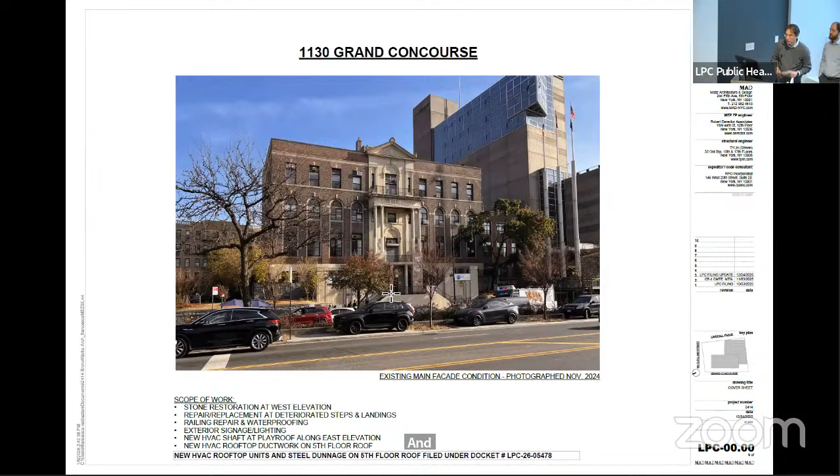As John said, this is the building. It's 1130 Grand Concourse. It's just at the 167th Street station of the D train. The building was constructed in 1926, and the proposal, as you can see at the bottom of the slide, is to essentially restore portions of this facade, the main facade, repair and replace deteriorated steps and other architectural features. Then there is a proposal for some signage and illumination as part of the restoration, since we're doing this work, and an HVAC proposal as well. We're going to focus on the first part of the presentation, which is the restoration work, and then we'll discuss the mechanical components of the project.

These are photographs for reference. You can see the 25-26 timeframe, as John mentioned. This is just as the building was finishing construction on the left, and the 1940s tax photo on the right. So you can see that the building looked pretty much the same at the 1940s.

It's located, you may be familiar with the Housing Court building and the Freedman House, the Freedman Home, which is right across the street, in a very elegant, wide portion of the concourse. As John mentioned, they do amazing social services, great organization. Our work essentially is to focus on the central portion of the building and also reconstruct certain components that have been stripped away from the building.

On the left is a photograph of the present day image of the building. It's had a lot of windows replaced. You can see that there's a lot of air conditioning units, et cetera. We'll see these photographs a little larger shortly. One of the key pieces of our proposal is the base of the building, which you can see on the top right.

It's basically been stripped of all of its architectural features, and there's essentially a very brutal stucco wall present between the two staircases that are the main entrances for the building. Since you do have to ascend these steps to get to the area where you see that 1130, that is the main entrance to the building, folks do have to use these steps.

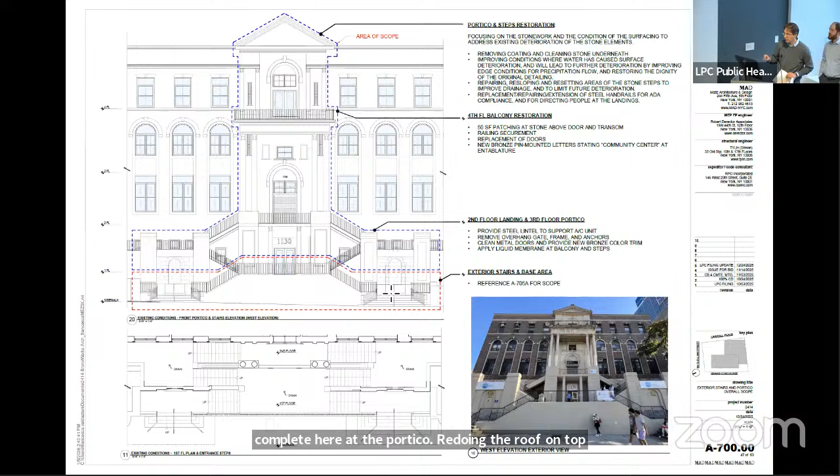There's restoration work that we're proposing to complete here at the portico, redoing the roof on top of this porch and balcony, the pediment, and there's a lot of paint that used to cover some graffiti and other things that we're going to be able to restore. Not any major removal of any of the parts, but basically a lot of surface cleaning, all the way down that central area within the blue zone.

The more substantial work is in the red zone at the base of the building, and that's what we're going to focus on here today.

When you look down in plan, at the top you'll generally be seeing our existing conditions, and on the presentation the lower portion will be the proposals.

There's a series of elevations that you can see here, starting from the bottom at the sidewalk. You go up a series of steps, about 6 or 7 depending on where you are on the sidewalk. You arrive at these landings, then go laterally and find yourself in the central zone, which allows you to come into the building where that 1130 was written. You can also continue up the steps, but that hasn't been done for a very long time, since the upper portions of the building are closed off, and there are some very simple chains that prevent you from continuing to ascend the stairwell, so you really are coming to that main central landing and then entering the building.

In our proposal, we're looking to do a series of things that we've highlighted here in color: reconstructing these green piers and the steps that lead from the sidewalk up to the first landing.

Reconstructing the two pink steps that you find to ascend to the landing, and then introducing a ramp, which is the orange piece, that takes you up essentially two risers, so that from the blue area you don't have to go through single steps to get into the building, just to facilitate the access.

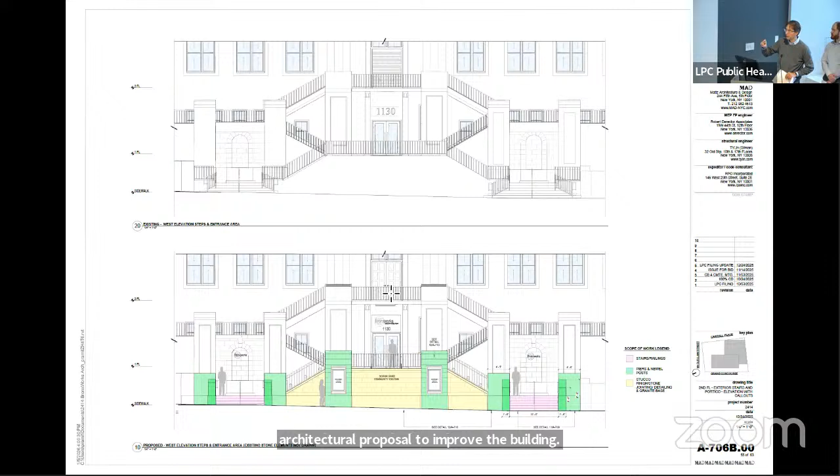At the base of this yellow zone, for example, and around the green piers, we bring back a granite base so that we have a nice durable surface and it's historically appropriate. In the upper band of the yellow, where you see the stone that replaces the limestone, we're doing it in stucco.

Obviously for the same reason that I explained earlier, the piers help us to limit the amount of steps that are within the pink zones, which we're going to see shortly in the photographs.

And then the central piers, the taller ones that you will see in the photographs coming up, we propose to put 2 digital signage screens to help the organization communicate what it does in the building as part of its programs. A larger version of this area focuses on the right-hand side of the plan and elevation, which you saw. Since it's basically symmetrical, this way you can see the architectural features in the proposal in a very clear way.

Top left, you see the existing condition and those steps that we were looking at in plan, and the railings that have been installed. The condition of the arch behind it, temporary signage that's been placed on the building, and you're going to see that what we've done is not only address the restoration components of the building, but then try to help them also identify in a more elegant way how their organization can do its outreach visually.

On the bottom left is a photograph from 1926, and you can see that originally the building did have these piers. They had urns and some stone detailing, as you can see, leading up to the top. Just behind the tree, there's actually a lamppost, which you may have noticed on the original photographs. We're obviously not coming here today to put back these piers in their identical manner, or the lampposts or the urns, but bringing back some of the features that we can reintroduce so that the building does get a good portion of its elegance back.

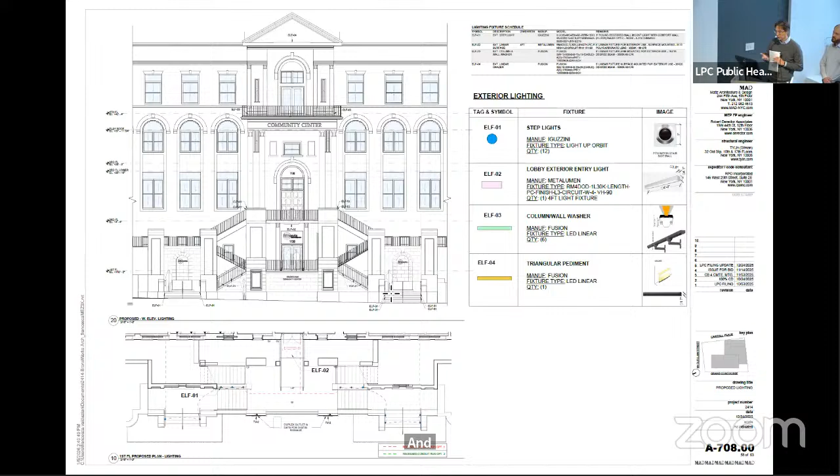Once we were looking at restoring the building, we spoke with BronxWorks and said that in a few spots we could do a little supplemental lighting to more elegantly treat the facade, which currently isn't illuminated at all. Aside from the step lights at the base, we're proposing very small fixtures, only 2.5 inches high in profile. The world of LED has really made our architectural lighting proposals so much easier without feeling invasive.

At the base of the columns, there's a proposal to uplight them. Above on the balcony, on the ground, you would not see the light fixtures, which also illuminate the pediment with a pediment light. We've annotated these on the plan, and you can see there are only a few spots where this is happening within the area of restoration.

Now my colleague will speak about the mechanical work. The other portion of the project is providing a central HVAC system for the building. The vast majority of the spaces don't have any air conditioning and rely on window AC units, which you may have seen in some of the photos throughout the building.

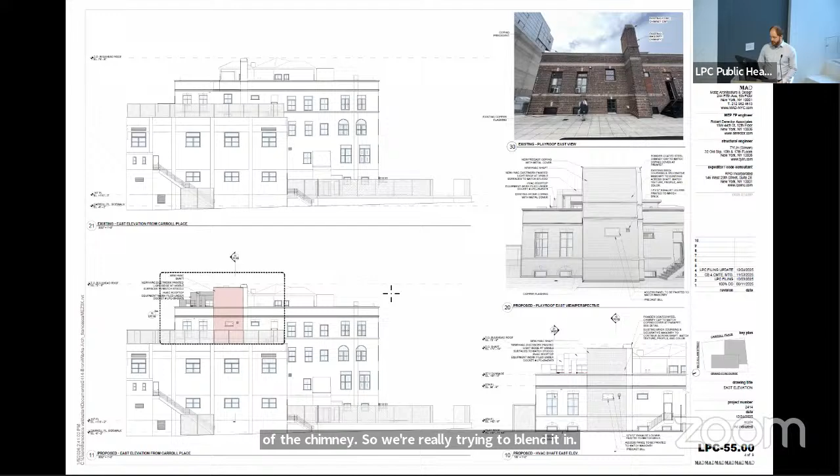The one position where you are able to see the shaft is from the northeast corner of the building, at Carroll Place and McClellan Street. From that corner, basically at the entrance of their current parking lot, we've hatched in red where the new shaft will go, tucking it in behind the chimney as best as we can to create one volume and have it blend in.

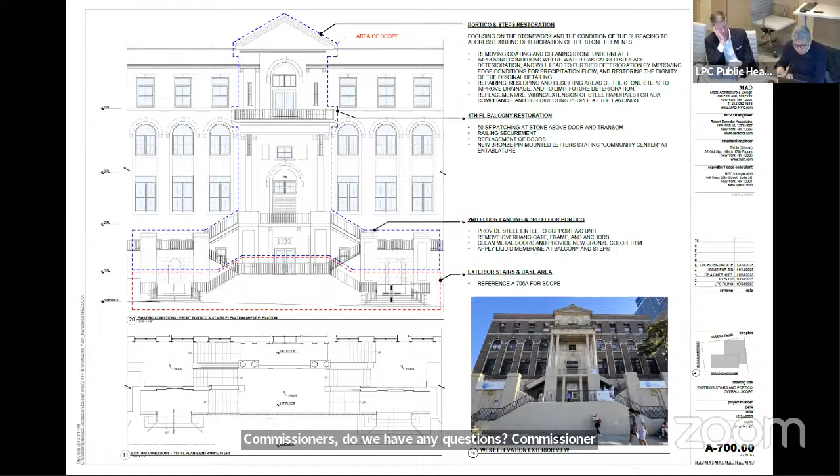Commissioner Chen? Yeah, if you can go back to your drawing, I guess, with the 706. This one, Commissioner? Oh, yeah. I'm looking at the lettering for 1130, which is on the upper portion, right?

I think the difference with what you're proposing now is that you intended for pedestrians or visitors to see from below. I'm wondering whether it's best, since you have so many displays down here, to identify whatever you need to put on the lower level rather than diminish the 1130, which is very distinctive and very easy for people to identify the building. People have trouble finding buildings and addresses on the street, so I'm wondering whether there's a better way to leave the 1130 as is, because it's highly legible and has a very nice font, and accommodate your other display separately.

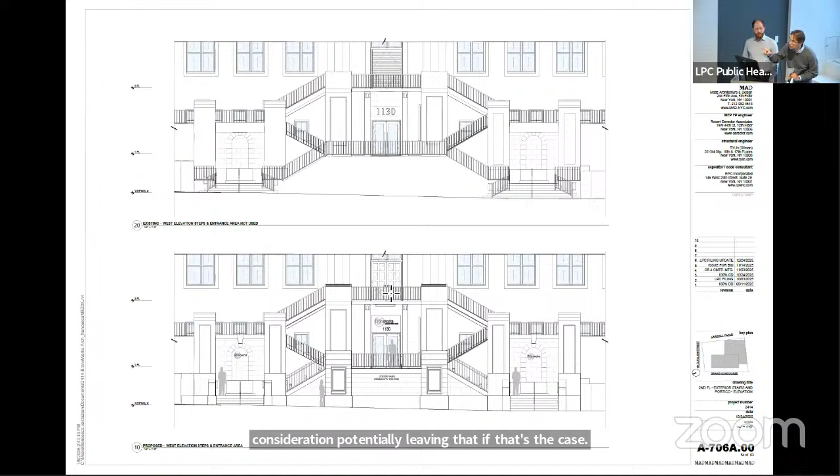Sure. You're correct that 1130 is very large and visible. We felt that scaling it down and allowing space for the name of the actual organization was going to work out. By having the Bronx Works identifiers in the arches, they'll hopefully be very visible because they'll be right in front of you as you find the steps. And of course, the digital signage, we hope that will also have information. But I guess we can take into consideration potentially leaving that if that's the case. We thought that between the name of the center and the digital signage, that would collectively identify the building.

Yes, I think, yes, thank you very much. Understood. The scale might have been reduced too much, and we can work with staff to increase that typography a little bit more. Thank you.

Any other questions? Commissioner Mahan? Hi there, a few questions. In reference to the signage we're just speaking about, are the doors and transom above it new or existing to remain? Those are existing to remain, but the transom we would be replacing so that we could take away that 1130 and rework the signage that's proposed, but the doors are existing.

And what will be the material of the new transom then? So we were going to have an aluminum backing, and the letters are also aluminum, with a bronze finish, consistently having a bronze finish for all of the signage so that it all looks singly done. Between the signage at the top of the building, the name at the bottom, and all the logos would be in the same bronze finish.

Thank you. You noted that there is granite being brought back. Where is that? Using the mouse here, the base of this portion, is that all granite? And from where that is, datum line down to the sidewalk. Thank you. And where's the stucco that you noted? So from that same datum, everything above that will be in stucco, but with the coursing implied, so that we bring the scale of that wall back to its original character.

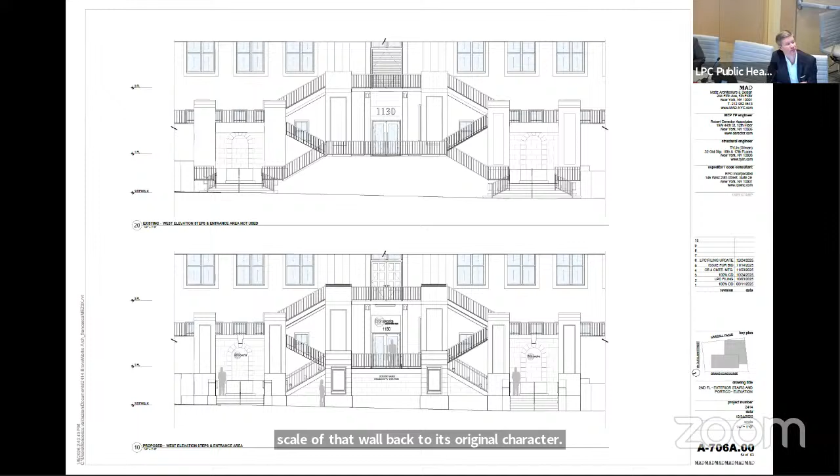Understood. I have one more question. Can you explain the purpose of the ramp, which is replacing two steps, but one still has to traverse nearly an entire floor's worth of steps before getting there? I didn't really understand that. Sure. As we acknowledged, this is not solving the accessibility for the building, but what it does is address the hazards present in this local area, at the very least—two single steps that are hard to see at night.

So if you can imagine in the evening, that one step in the foreground between the columns, and there's another one right at the door. So in order to facilitate those two single steps, what we've done is in section, take the elevation of the ramp landing and bring it to the doors, so that you have a proper flat surface when you exit—if you're coming out with an older person or with your kids—you have a level surface, not a step immediately, and then gradually descend down to that open space right in front.

So you also don't have that second hidden step that you might not notice right at the front edge. We're essentially solving two potential hazards by having a slope that facilitates entering and exiting the building. You're correct, it's only at this location, but at least we've addressed these other hazards that are present.

Commissioner Wilder: Thank you. Quick question tied to the ramp. I'm trying to understand what typically happens with circulation in that area. Because when you're adding the ramp, I guess the railings are kind of cutting off the sides, and also in front where the ramp starts, that seems like it would be a natural area for people to walk. So do you think this will negatively impact the way circulation happens around this base?

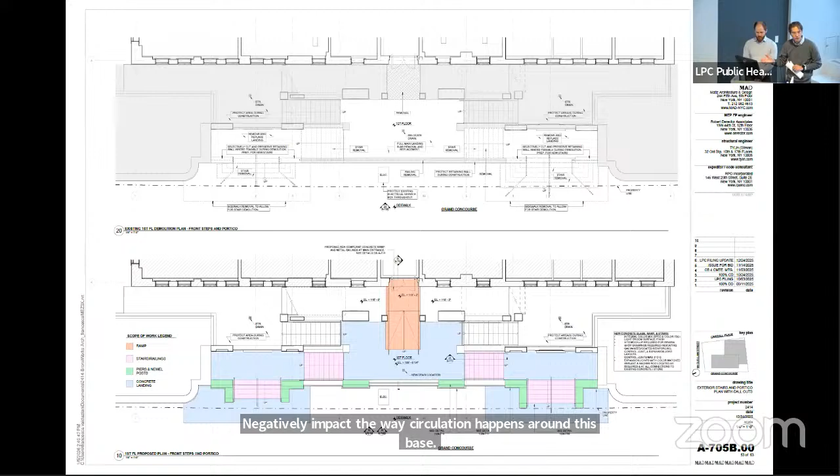As you asked your question, I was going to the slide that I hope would help answer you. Here we're looking at the full plan of the entire stairs and landing system. You can see I'm guiding you to the orange portion—the two doors that swing out as you enter the building. The ramp would be composed of a portion that allows—you can see we've consciously left the front of that landing and the bottom of the ramp to align with what we see as a natural rectangular surface. So if you are walking up to the building, you still have all of that blue area surrounding the orange ramp to stand, socialize, etc., and then you can enter the building.

You would also be able to squeeze between the pier and the sidewalls if you wanted to—we're not preventing you from cutting through here or through here as well—but we think most people will just enter through there, and this would be an open space here.

Yeah, the sides are dead ends basically, underneath the upper stairs coming down. So the head height quickly goes down to only about 5 feet, and they're basically dead ends. There's a couple window AC units there. So it's actually a benefit to kind of guide people away from using those spaces since they're kind of a dark dead space.

Not currently, and there is one light above, which you see, where we're going to replace that with a larger linear fixture so we better illuminate the space, but basically both sides are dead ends. And Commissioner, currently if you were to walk under that portico and look to either side, you'd see the actual existing steps.

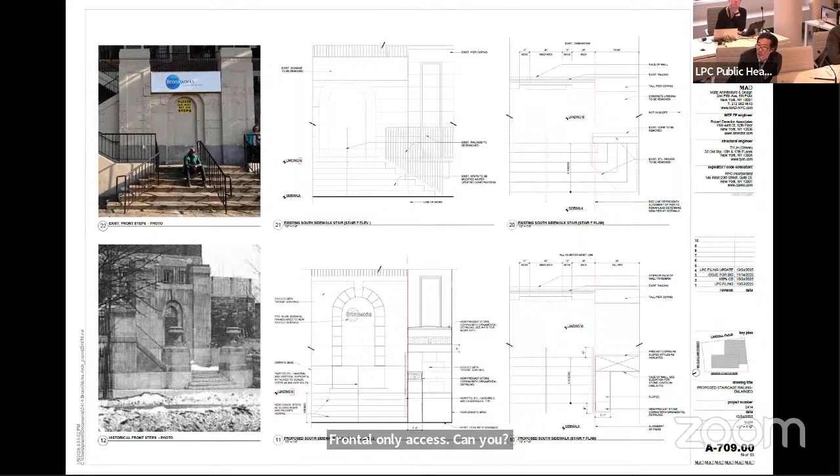Sure. So in analyzing what we could potentially reintroduce, the idea was to bring back that rhythm that obviously has been removed. There were some internal conversations about whether to put back the piers at the same scale and size they were originally—they're larger—and we were concerned about the massing, but then we weren't going to be putting back the urns, and we weren't going to be putting back any lampposts, etc. We would have had these large, heavy piers that we'd be discussing today with nothing sitting on them.

So we thought that if we made a slight modification to the proportion of these, we could still recall the history of the building, and do it in a way that would be subtle enough that only us having this conversation today would realize it compared to the historic photo. We can elegantly reintroduce the piers and make them slightly smaller, which is what you see in our proposal, where they still contain the steps and still welcome you into the building, but because of their rectangular nature... let me just go to the plan, apologies.

I'm going in the right direction, sorry. Yes, in plan, you can see that by staying shallower with these green features, we don't have this large horizontal surface like in the original photograph, which would have been a flat surface we'd have had to deal with from a water management standpoint, but then it would have felt like we put back an empty element to the building. So we come to you today with a proposal to reintroduce all of these, bring back the rhythm, bring back the elegance to the building, but do it in a way that's not an exact replication of the original.

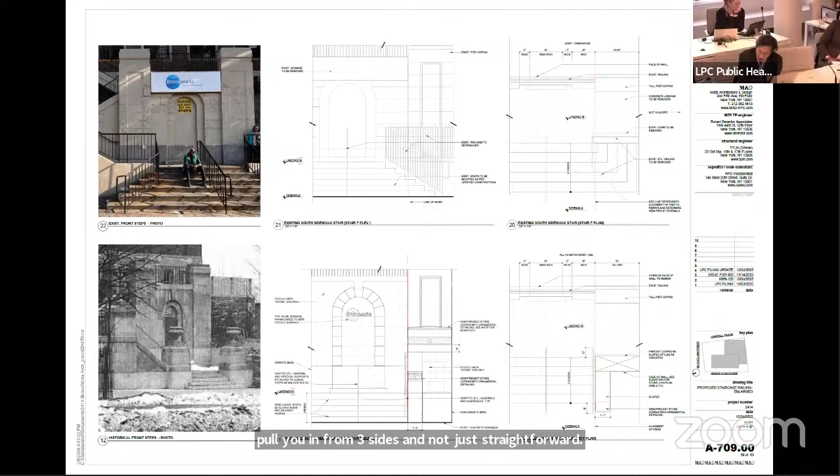Another question I had is you mentioned recessed screens for the digital elements. Did you mean recessed into the stucco, or did I mishear you? That's correct. In this particular case you can see them contrasted, the white to the green. They're actually recessed into the new piers so the screens are flush with the stucco, and we don't have these additive boxes built on top. We're able to set them into the wall.

My only comment there is the long-term viability of that. We often do these digital monitors inside lobbies in sheetrock, and everyone always says why did we do that, because the screen just changed size the next year. I wonder whether that's aesthetically... I understand what you're saying, but because they are in fact imitation or faux stone, it may accentuate the faux nature because they're recessed, and that would never really happen in such a manner in true stone.

Understood. Would you be concerned about the maintenance and the viability and their life cycle long term? I'd hate for there to be a new screen five or ten years down the line that didn't quite fit right, or seemed like a funny retrofit. You're correct, obviously technology shifts while we're speaking, but the cases are independent of the screen, so the screen could be placed in there. As long as you're pretty close, you can get one that would be replaced if necessary. So the case and the screen are two independent components, so if there was a failure of technology, that screen could be replaced within the same case.

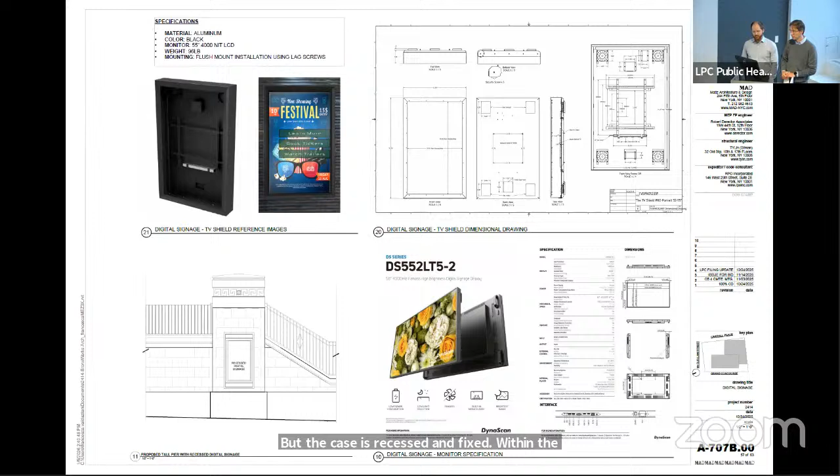But the case is recessed and fixed into the stucco? Within the stucco pier, yes. Okay, I think that covers my questions. Thank you. Commissioner Jefferson?

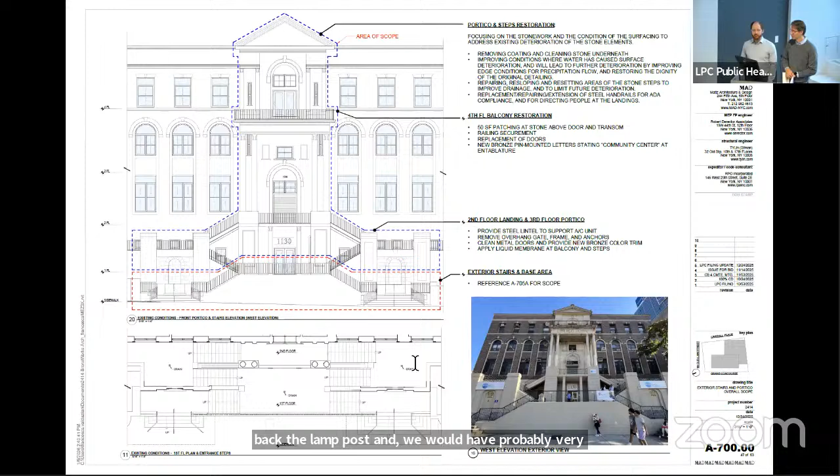Okay, any other questions? Let's move to public testimony. I'm going to note that there's nobody in the room to speak on this item. I'll turn it over to our Director of Intergovernmental and Community Affairs, Stephen Thompson, to see if we have any remote testimony. Those joining via Zoom who wish to speak, please use the raise hand function. Seeing none, I'll note for the record that Bronx Community Board 4 recommends approval.

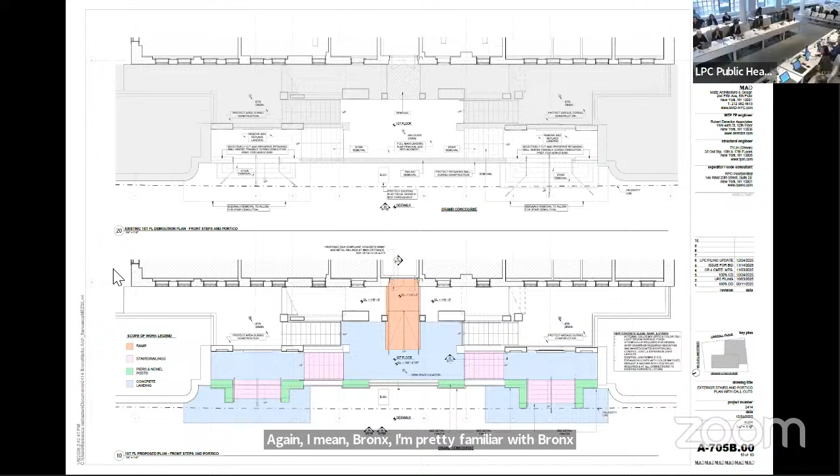Again, I'm pretty familiar with BronxWorks. The mission work is so important to our city now more than ever. I think their association with this building is very important.

Thank you, Commissioner Chen. I'm in agreement with Commissioner Goldblum. I think the ramp in the center door is important, even though that single step is dark—when visibility is low, I think it will help prevent accidents. I think it's unfortunate, correct, that this building is not more ADA accessible, but given the limited budget, I can tell by the tone of the applicant's voice. I will follow Commissioner Goldblum's suggestion about having them work closely with staff regarding the stucco.

Thank you, Commissioner Mahan. Thank you for the presentation and the important work that the owner undertakes. That being said, I personally had some difficulty following the decision-making logic in this project.

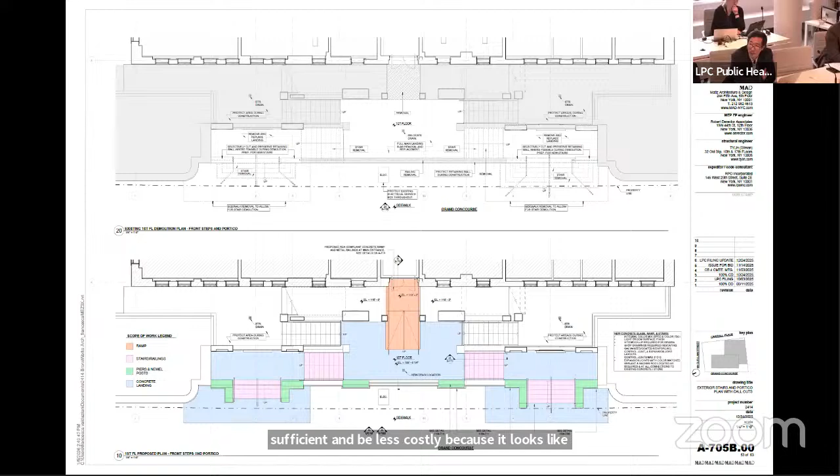Those are my comments. I think the rest of this looks fine to me, the signage, the minimal approach. I'm okay with the rest of the proposal. I just think the base needs some work at the walls and the detailing. They seem a little too simplistic, and I think that can be done at a staff level.

Thank you. Commissioner Jefferson?

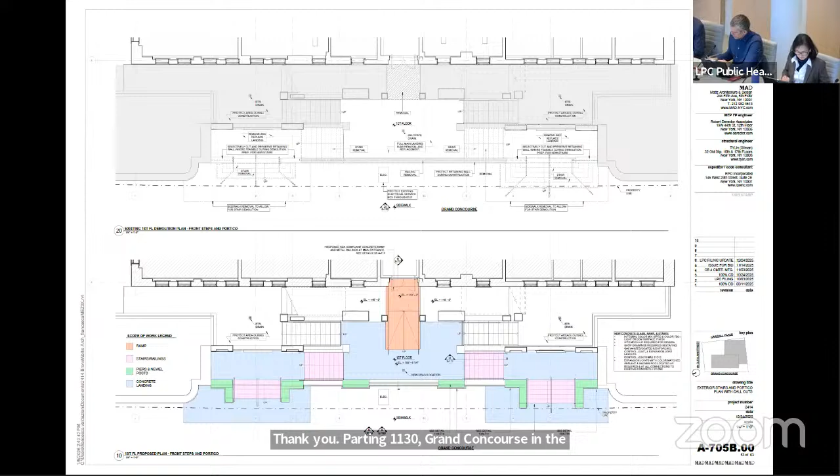Regarding 1130 Grand Concourse in the Grand Concourse Historic District, the application is to alter the facade and stairs, install signage, and construct a rear yard mechanical addition. I note that the building style, scale, materials, and details are among the features that contribute to the special architectural and historic character of the Grand Concourse Historic District, and I recommend approval with modifications.

Finding that the work will not damage or eliminate any significant architectural features of the Grand Concourse facade, but will restore it to a condition more in keeping with its original appearance, including the restoration of piers and reorientation of steps to better recall the placement, dimensions, profiles, and details of the original stone stairways. That the proposed resurfacing, mortar, stone copings, and granite base will match the color, texture, finish, and bond pattern of the original stone. That the proposed installation of a ramp at the first-story entrance...

That the proposed signage, consisting of non-illuminated pin-mounted letters for building identification and illuminated inset LED sign boxes for programmatic information, will be in keeping with the variety of signs traditionally found at larger institutional buildings, including at this one. That the proposed signage will be well scaled to the entry piers and walls and will remain a secondary presence to the highly ornamental features of the facade, and will not overwhelm the building.

That the proposed masonry-clad HVAC shaft at the rear facade, which will be partially visible at an oblique angle from McClellan Street, will be placed adjacent to an existing masonry chimney clad with brick to match an adjacent wall, and will screen. That the work will enhance and support the continued use of the building as a community center and will not detract from the special architectural and historic character of the Grand Concourse Historic District.

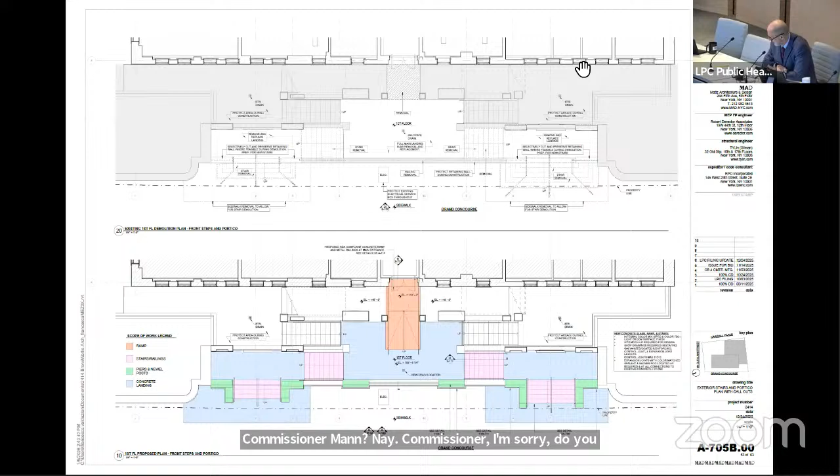Vice Chair Master, aye. Commissioner Chen, aye. Commissioner Chu, aye. Commissioner Goldblum, aye. Commissioner Jefferson, aye. Commissioner Mann, nay. Commissioner, I'm sorry, did you say nay? Nay. Commissioner Wilder, yes. Okay, with 6 in favor and 1 opposed, the motion passes.

Thank you, that's been approved with modifications. Please continue to work with staff.

All right, we'll now move to the next item, public hearing item number 2, LPC 26-04038, an application for a certificate of appropriateness in the Borough of Brooklyn, Block 324, Lot 55, 362 Clinton Street in the Cobble Hill Historic District. This is an Italianate-style row house built in 1843, and the application is to construct a rear yard addition.

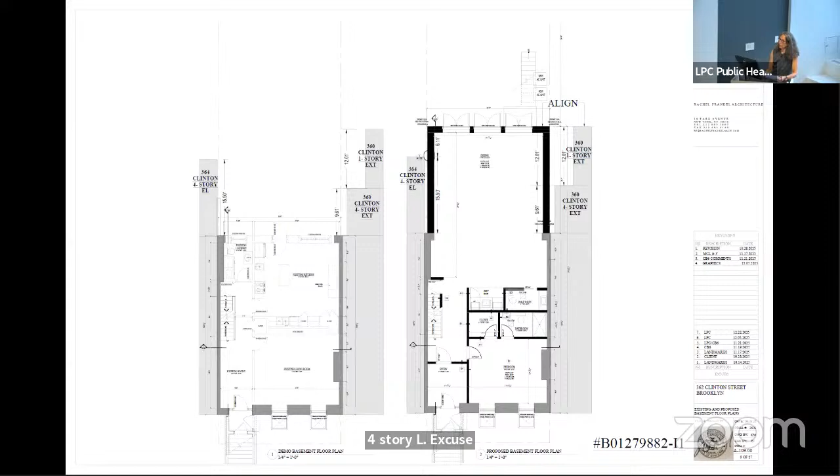Existing and proposed parlor level floor plans, same footprints as I just described for the basement. Existing and proposed second floor plans.

The proposed four-story extension aligns with adjacent 360's full-height extension and is set back 6 feet from adjacent 364's full-height L. Where our four-story building was once hemmed between its neighbors, it now aligns with the one on the right, yet remains hemmed behind the one to the left.

Existing and proposed third floor plans, same as the floor below, as just shown. And existing and proposed roof plans. No work proposed for the roof.

Now for context, precedent, and visibility. Fire insurance maps from the late 19th and early 20th century show the persistence and precedence of several large rear yard extensions in the block, and that as early as 1886, the unity of our row's rear facades ceased to exist.

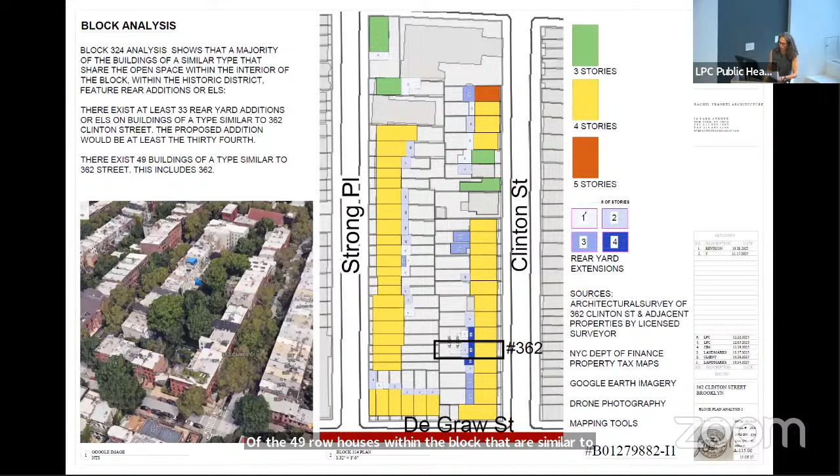Of the 49 row houses within the block that are similar to 362, 33 of them, the majority, have rear yard extensions.

To reiterate, our proposed four-story extension aligns with adjacent 360's full-height extension and is set back 6 feet from adjacent 364's full-height L. At the upper floors, our building will align with one neighbor but remain set back from the other. Our proposed lower two-story extension aligns with 360's one-story extension and projects in front of 364's full-height L.

Several of the historic extensions in the block extend deeper into their rear yards than our proposed two-story extension would in ours. Our proposed extension leaves an ample rear yard, and because any continuity of the row ceased to exist long ago, and the context is varied, our proposal does not disrupt the historic fabric. Our proposal is only minimally visible from DeGraw, and therefore the public's experience is not changed.

On the left is the view from DeGraw in 1969 at the time of designation. On the right is the same view today, with a photo montage of the proposed four-story full-height extension along with a zoomed-in, not actual view. The proposed two-story extension is not visible from this view.

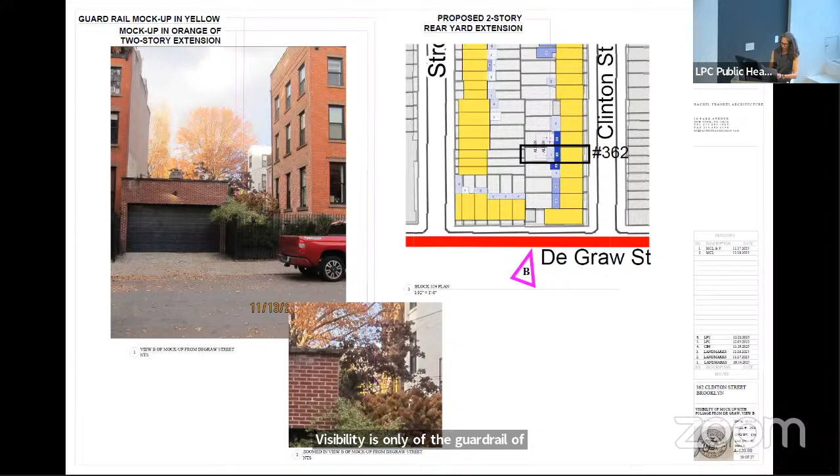This photo is taken from the same view without foliage. From this view too, there's no visibility of the proposed four-story extension. There is some visibility of the proposed two-story brick extension and its terrace guardrail and stair leading to the rear yard.

This is a view of the mock-up from the rear yard. This slide juxtaposes the view of the four-story mock-up on the left with a photo montage on the right, all with foliage. This slide juxtaposes the same view, all without foliage.

This slide juxtaposes the view of the two-story mock-up on the left with a photo montage on the right, all with foliage. Visibility is limited to the terrace guardrail. This slide juxtaposes the mock-up of the extensions. This story juxtaposes the view of the two-story mock-up on the left with a photo montage on the right, all without foliage. The prior one was with foliage. Pardon me if I got a bit confused.

And this slide juxtaposes the mock-up of the extensions with the photo montage viewed from the rear yard.

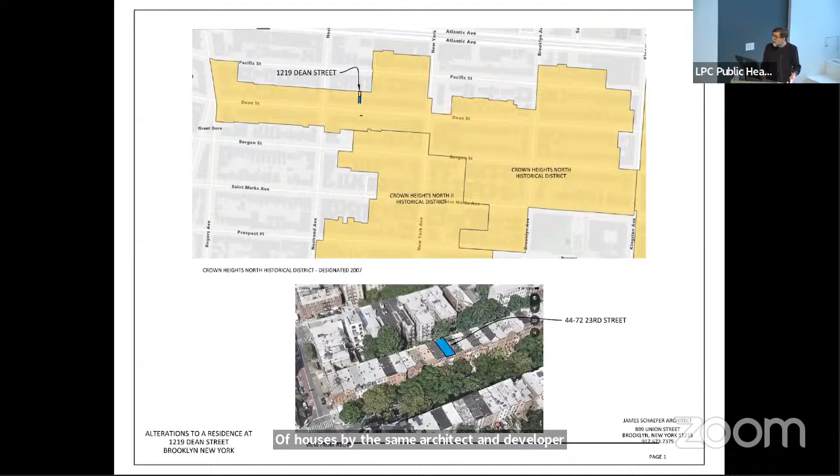My name is James Schaefer. I am representing the owner of 1219 Dean, part of the Crown Heights North Historical District, designated in 2007, a Romanesque revival built in 1891, designed by Albert White, part of a pretty intact row of houses by the same architect and developer. I know you have a busy schedule where our ask is pretty small. We're basically talking about 3 transom windows, so I'll get down to that.

These are shots of the neighboring buildings with ours in the circle, the tax photo and the designation photo. The only picture we could find of the transoms in question is there at the bottom.

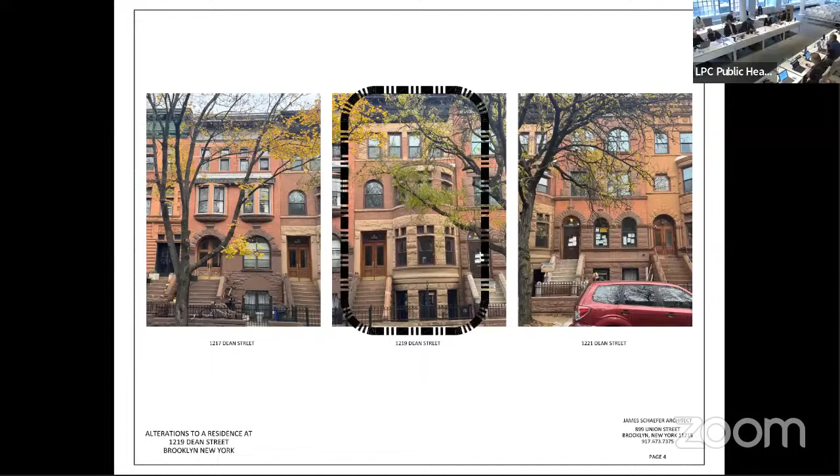Good morning, Commissioners. I'm Christina Conroy for the Victorian Society. The Victorian Society urges denial of this proposed legalization in the strongest possible terms.

Stained glass windows are a very typical feature of Romanesque revival houses. Architect Albert E. White included them in the design of several houses he designed in Crown Heights North, and the ones removed from 1219 Dean Street are specifically mentioned in the designation report. If the windows were removed and not retrievable, there are many stained glass studios in New York City which would be able to recreate them.

If energy conservation is a concern, at these very small windows, interior storms would be a perfectly appropriate solution. Thank you, Commissioners.

Anyone else joining via Zoom who wishes to speak, please raise your hand. Seeing none, I'll note for the record that Brooklyn Community Board 8 also recommends denial, citing the stained glass.

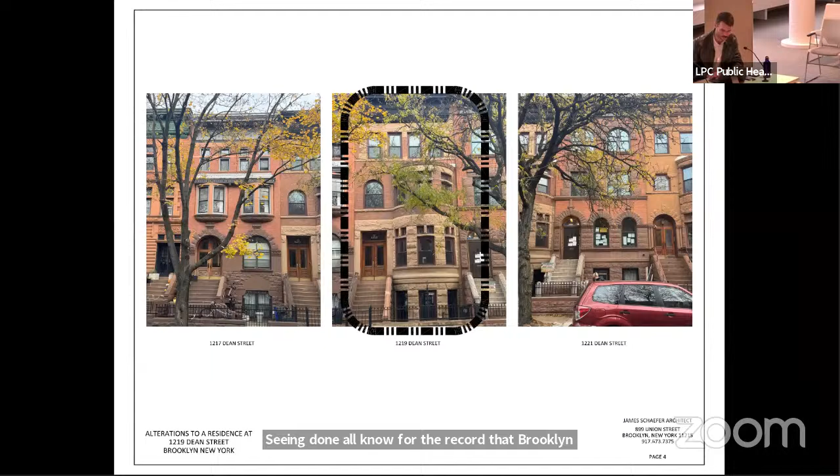Thank you. Would the applicant like to respond to the comments? The only response I have is that it was a decision based on time and expense. Since the owner did install the transoms on the parlor floor, it wasn't an aesthetic choice and it's not an energy choice. It was just for time and expense.

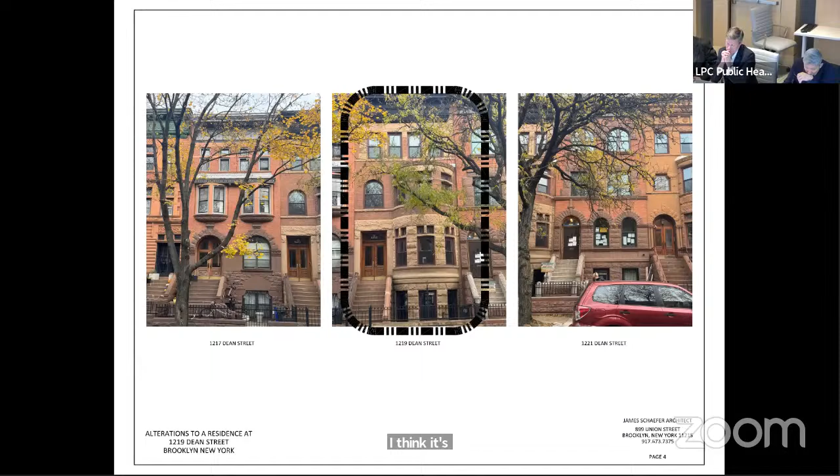Commissioner Wilder? Yes, thanks for the presentation. I think it's a good thing that the stained windows at the parlor floor were able to be reinstalled. Unfortunate for the second floor that they were not found. I think I would definitely prefer the stained glass over the clear, but I can still find it appropriate.

Thank you. Commissioner Ginsburg? Hopefully I didn't just disconnect. I guess not. I can agree with Commissioner Wilder. Thank you. Commissioner Mayen? Looks good. Thank you. Commissioner Chen? Same here. Commissioner Goldblum? Agreed. Commissioner Jefferson? And Commissioner Chu? Okay. Would you like to read the motion?

In the matter of LPC 25-11-523, 1219 Dean Street, Crown Heights North Historic District, a Romanesque revival style row house with Renaissance revival style details designed by Albert E. White and built circa 1891. Application is to legalize replacement of stained glass windows without Landmarks Preservation Commission permits. I note that the building's style, scale, materials, and details are among the features that contribute to the special architectural and historic character of the Crown Heights North Historic District.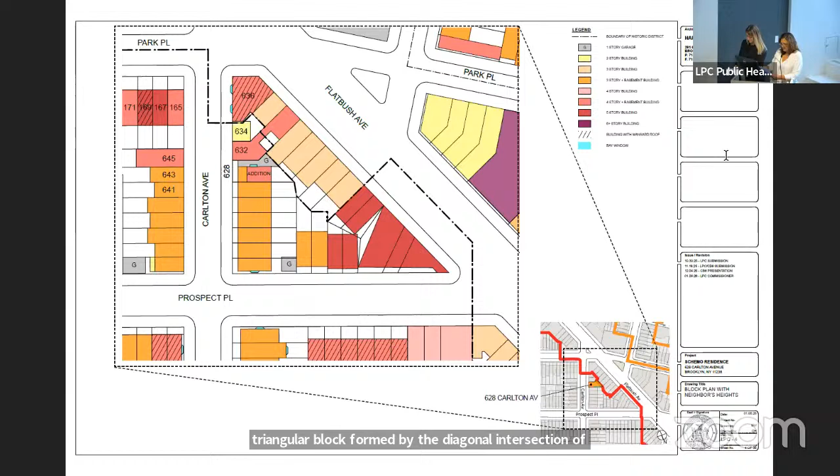As you can see, it's a triangular block formed by the diagonal intersection of Flatbush Avenue with Carlton Avenue and Prospect Place. As seen from Prospect Place, 628 Carlton is the last in the row before the nature and scale of the block changes. The rear property line runs parallel to Flatbush, and the view into the donut is compromised by unprotected rear facades on Flatbush and taller structures at the corner. There are also many taller buildings at the intersection of Flatbush, Carlton, and Park Place, which are 4 and 5 stories tall with varying mansard roof conditions. The juxtaposition of this end property to those buildings makes it unique in its context.

This is the same view via Google Earth, where you can see the triangular donut, taller buildings at the end of Carlton, and the rear facades of the buildings along Flatbush, which is outside of the district.

These are street view images for context, showing the varying scales of the buildings and surrounding property. The upper row is 632, 634, and 636, immediately to the left of the property. On the bottom left, you can see 643 and 645 on Carlton, across the street, which also start to break the height mold. And then a few properties along Park Place, 167 and 169, that also have varying heights.

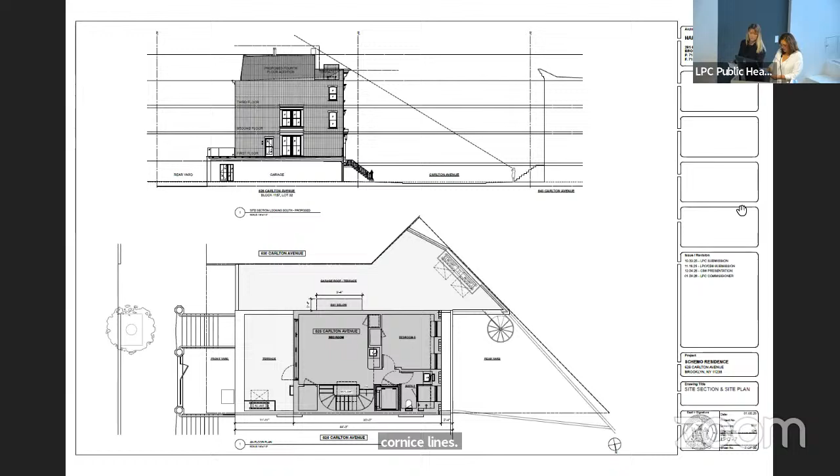In the next few slides, we'll show you a series of renderings and the mock-up of the vertical addition and its visibility. For reference, the highlighted yellow dots show the only places where the addition can be seen within the cone of vision. In this first view, view A, the addition cannot be seen.

Here you can see it minimally, the addition from the left side of the building. But also because we're increasing the wall height along that side facade, its visibility is limited.

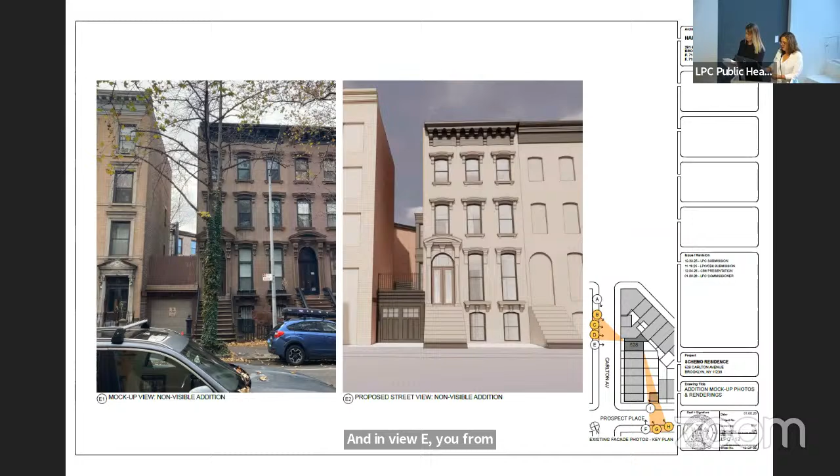In views C and D, coming up next, we can see it visible from the side, and you can start to see the bay window. We believe this side visibility is pretty consistent with end buildings typically seen in historic districts. In view E, from immediately in front of the building, you can't see the upper floor addition, but you do see a little peek of the bay window over the garage.

From the rear, there are two vantage points where it can be seen, which we're going to walk you through - those are G and H. But for starters, this is view F, where the mock-up cannot be seen. These next two views are the only two views in that cone of vision from Prospect Place where you can see the rear, where you could see the addition.

These are views G and H. So this is view G. And here at view H, you can also see that there's some pretty strong foliage that does hinder the visibility of the addition.

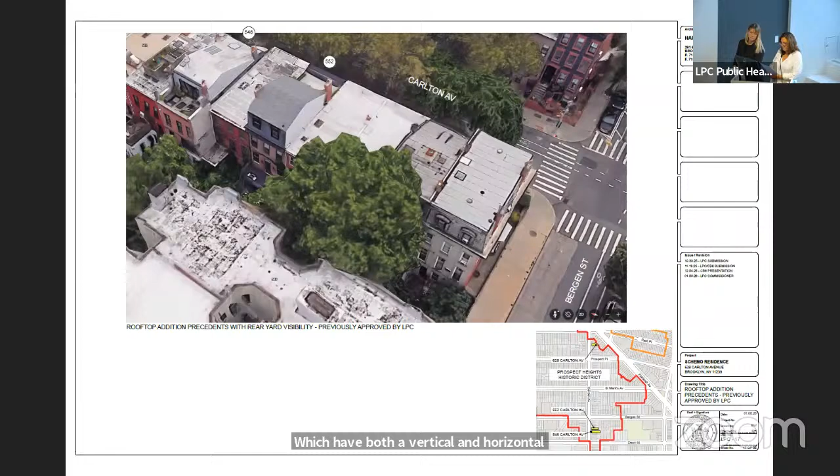We found two instances of precedent for vertical additions with similar rear visibility along Carlton. Both projects gained approval around 2018. In this overhead view, you can see 546 Carlton, which had both a vertical and horizontal visible rear addition, and 552 Carlton, whose top floor addition included mansard detailing and chimney extensions. That addition is not set back from the rear facade.

These additions are clearly visible and are also located mid-block in their row of townhouses.

This is a close-up view of the vertical addition from the rear, really a bird's-eye view, so you can't see it from this perspective from the street, but wanted to give you a little more detail. As you can see, it's set back from the cornice line to maintain the architectural continuity of the row houses. You can also see how, since the addition is at the end of the row, it starts to relate to the triangular corner, including the apartment building to its south at 632 Carlton.

The materials chosen are meant to blend with the sky and are typically seen in similar additions. We're proposing a metal standing seam material on the rear facade in a gray color, a stucco at the side to match that color. We also would like to paint the existing brick facade, which currently has been parged with cementitious finish, a brick color so that it comes back to its original intention.

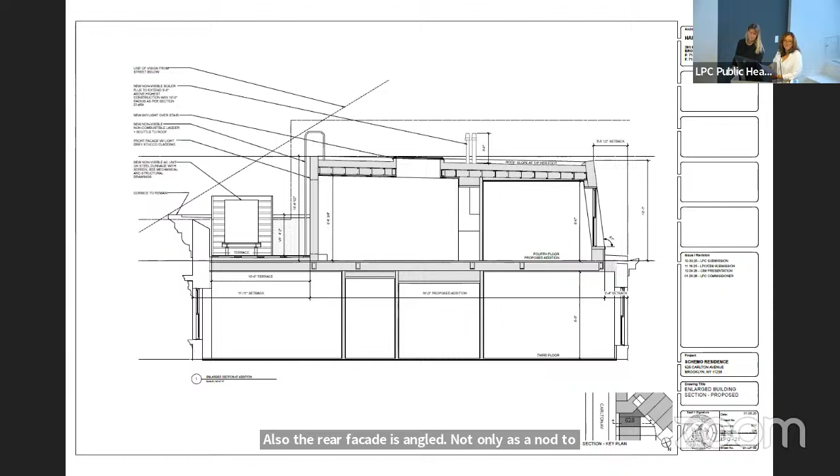This is a blow-up section of the addition. You can see it's set back from the front and rear. Also, the rear facade is angled, not only as a nod to mansard detailing, but also to further minimize its visibility from the rear. These are some elevation drawings of the rear facade with the addition, and a rendering side-by-side with the existing rear facade.

For the front of the addition, we'll continue the same gray stucco color with black windows. You'll start to see the exposed side facade where we're planning to paint the brick the same color as the rear to unify the brick throughout.

You can also start to see the bay window in the rendering as well. This is a front facade drawing.

So this is the side facade with the new bay window. You can see the addition at the top, which will be clad in brick on this side, to create a stepped wall, which you typically see in historic buildings on corners.

This is a drawing of the side facade. Here you can see the parapet wall as well, which gives you an overview of the architectural details.

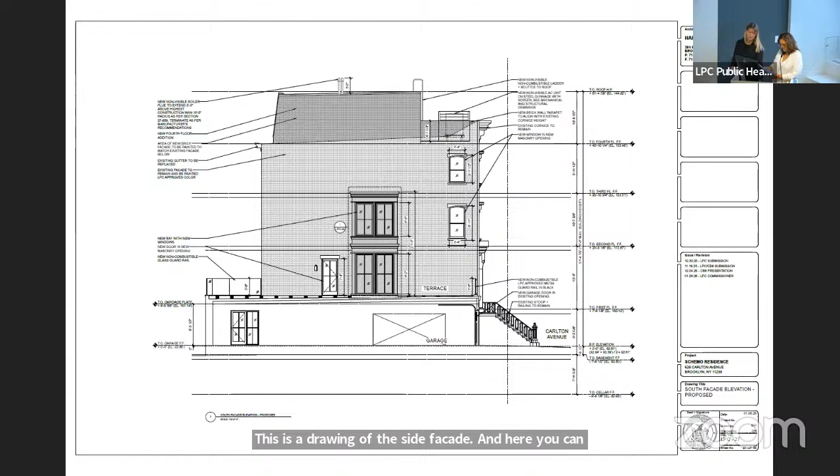These are drawings of the new bay window. The bay is proposed to be 10 feet wide by 21 feet tall to cover 2 stories of the building. We aim to create details that mimic historic bay windows in the neighborhood, and we'll install 2/2 windows to give the bay a contextual feel.

We've also included some contextual photos in the area along Prospect Place, Carlton, and St. Mark's Avenue that have historic bay windows.

We also wanted to include, even though this isn't in our historic district, the top photos as an example of new construction in the Cobble Hill district, with a close-up of a two-story bay that we think was done well, giving a nod to the historic corner buildings. The bottom row has some other examples of approved projects. On the left is a bay window that was approved, and on the right is a covered porch approved at Cambridge Place.

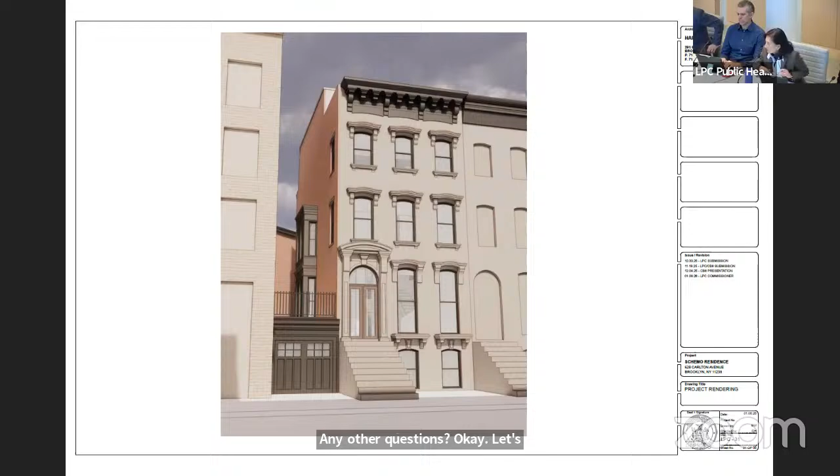Good morning, Commissioners. I'm Patty Hagan from the Prospect Heights Neighborhood Development Council. PHNDC hereby presents testimony about the Certificate of Appropriateness application for 628 Carlton Avenue, one in a row of Anglo-Italianate style row houses designed by William Flanagan and built in 1871.

The application is to add a rooftop addition as well as make alterations to the south facade of the building, including 2 punched windows at the 2nd and 3rd floors, a 2-story bay window at the parlor and 2nd floor with windows on 3 sides and a doorway at the parlor floor.

The proposed addition of the punched windows, a 2-story bay window, and a door are new to this building and will be visible from some angles on Carlton Avenue. However, they are architecturally and historically consistent with other similar windows and bays on other nearby buildings in the Prospect Heights Historic District. The replacement of the garage is likewise contextual in the district. As such, we do not object to these changes.

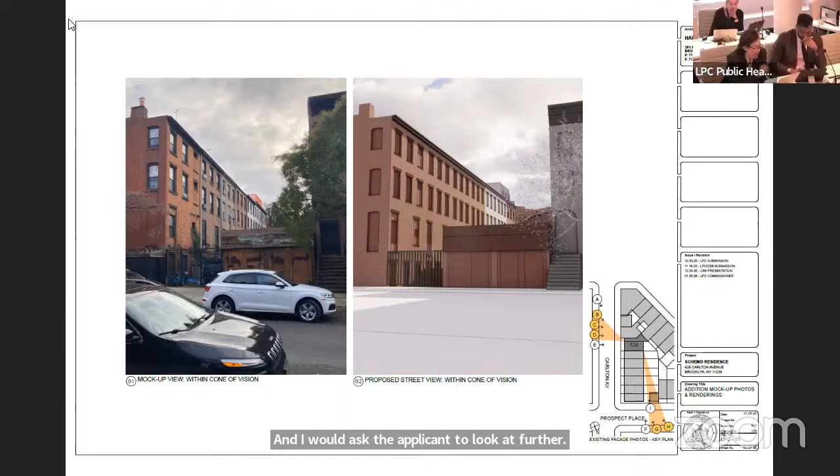My comments are related to concerns about the mass of the addition on the rooftop. It feels very visible from Prospect Place when I look at those views. The existing block looks quite intact with the rear facades. This would be the only addition on the roof. I could entertain an addition, but I do think its mass is too prominently seen from Prospect Place, and I would ask the applicant to look at further increasing the setback. The mansard aesthetic looks a bit awkward here, and I wonder if just a straight facade might be simpler. It's clearly an addition. There's no confusion that that is not historic.

I think that it just draws more attention to itself as proposed. Thank you. Commissioner Jefferson? I would agree. The only issue I have is that I think 30 feet for the addition is quite large. I would imagine if you could cut that back maybe 5, 10 feet. I agree that the simplification of the facade would also help.

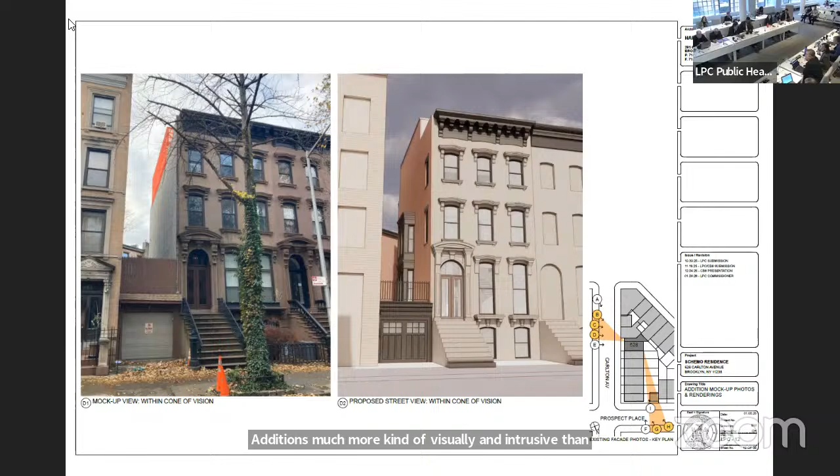Thank you. Commissioner Goldblum? I'm actually more or less okay with this as is, although I think that the suggestions made by cohorts would be good additions to it. I think that there might be possibilities to reduce the height of it a little bit. I'm also not sure about the stucco side wall. Looking at the examples they showed of other buildings with similar mid-block rooftop additions, it seemed like the side walls really kind of jumped out at you and made these additions much more visually intrusive than they needed to be. They might want to look at either extending the brick up or having the metal continue around. For some reason the stucco just seemed inordinately loud.

Thank you. Commissioner Chen? Interesting comments. I think that I have no problem with the bay window. Those are correct. I agree with the rest of the comments. Michael Goldblum and Commissioner Chu made great comments. To Michael Goldblum's point, I think with the side, the parapet can break the mass a little bit on the D2 view that was just before, on the two prior slides. The other thing is I agree that the massing seems a little bit too large, like the rest of the commissioners. I have no problem with them trying to modify and working to see. I have no objection on the mansard roof, seeing that the applicant has shown other cases where this commission has approved it. But I do agree with the comments about trying to modify it.

Thank you. Commissioner Mahan? I'm in agreement with Commissioner Chu. Consider eliminating the mansard language and setting back further from the rear facade.

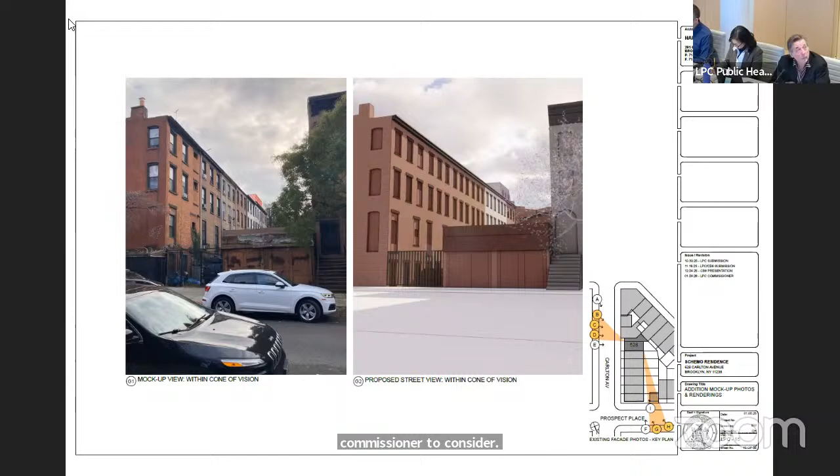Thank you. Commissioner Ginsberg? I agree with my fellow commissioners. I could live with the mansard, but set it back a bit farther. I also think the suggestion that the side be something different, to look as an addition, potentially a lighter color, will help minimize the effect of the rooftop.

Thank you. Commissioner Wilder? Yeah, I think I'm in agreement with everyone's comments for the most part regarding the massing of the rooftop addition. I'm okay with the additions on the side with the bay window and the windows. Thank you.

Commissioner Chu, would you mind reading the motion with the comments you had mentioned, and then ask them to explore the stucco side wall, a different material, with staff? Thank you.

Case of LPC 2604, 628 Carlton Avenue, Prospect Heights Historic District, an Anglo-Italianate style row house designed by William Flanagan and built in 1871. The application is to construct a bay window and a rooftop addition.

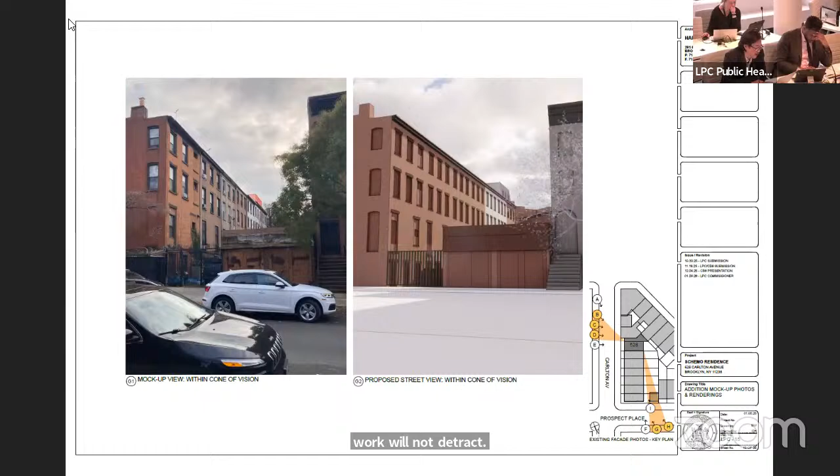will be in keeping with the materials and character of rooftop additions found throughout the historic district, that the proposed rooftop addition will only be visible from limited vantage points over the side facade from Carlton Avenue, and due to a gap in the street wall from Prospect Place in the context of secondary facades, and that the work will not detract from the special architectural and historic character of the building or the historic district.

We do ask that the applicant relook at the rooftop addition, reduce its mass and visibility by increasing the setback or potentially as well reducing the height. In terms of the exterior cladding, we also ask that the applicant look at a more consistent approach of the addition so as to minimize its multifaceted or multi-material current proposal that draws undue attention to itself.

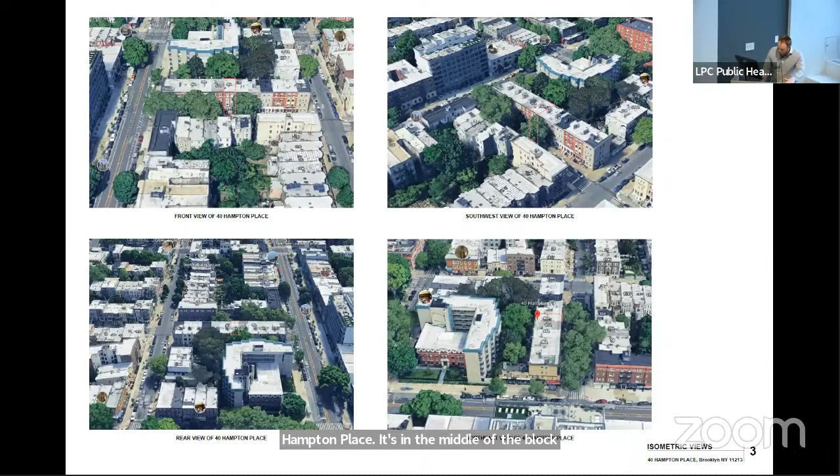This is located in the Crown Heights North Historic District. Here are some bird's eye views from Google Maps of the location of 40 Hampton Place. It's in the middle of the block, and there's a lot of foliage in the donut. Here is a block plan showing our proposed addition.

So on St. John's Place, there's a 1-story enlargement that blocks the view from St. John's Place. From Kingston Avenue, behind the rear of 40 Hampton Place, there's no visibility. And on Sterling Place, if you look at the top, there's a 1-story garage and a little wall that's 1 story, and from that, the addition will be visible.

Here are the views and the mock-up of the 2-story rear addition that we're proposing. If you look at the bottom, pictures 5A and 5B, that's where the mock-up will be, we see visibility from the mock-up. If you could see the green tarp, 5A is the view from across the street, and 5B is a zoomed-in view.

Here is a section showing the enlargement. We're proposing a 2-story, 15 feet enlargement. Originally, we wanted to do a 3-story enlargement, but after reviewing with landmarks, we scaled down for more context and less visibility from the street.

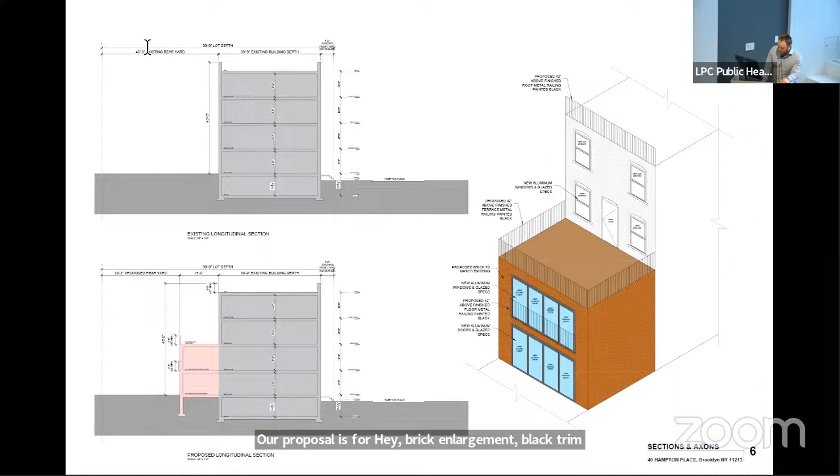Our proposal is for a brick enlargement, black trim windows, with a metal railing. Here is a rendered view of what we hope it to look like. Additionally, we would want to put a fence around the area. And also you could see a rendered view from Sterling Place from the location of where it would be visible.

Here is a rear elevation of the proposed design. Let me go back a second to give some background on what is happening. Right now the building does not have a facade. As you can see, there's a tarp.

The owner originally started this project and did not file for plans. He did not do it the right way, so there was a stop work order and emergency work. After the building was stabilized, we came in to first get approval for rebuilding the original facade, and then since we are doing this, he wants to file and do legally an enlargement. So right now there is no facade, it's just a tarp.

And then you have the mock-up. I apologize for not seeing it earlier, but now that I'm seeing the elevation it reminded me—this is actually what was approved, this is what it was approved to be rebuilt. And then in the center, this is the proposed enlargement. We are proposing to do a CMU addition with brick veneer. So you have a detailed section, and here are the demolition plans and the proposed addition floor plans.

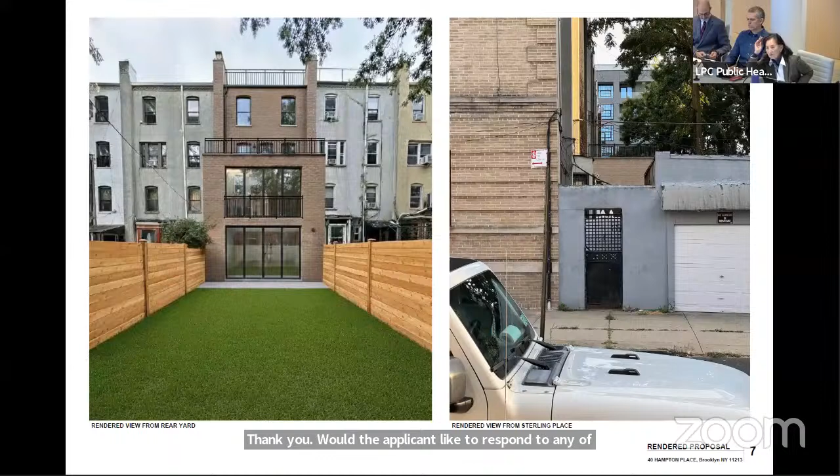The owner has acknowledged that we might have to bring some architectural features back, and he's open to that idea, in a way that it would work with interior layouts.

Thank you. Commissioners, do we have any final questions? Let's go ahead and close the hearing. Commissioner Wilder, would you make a motion to close the hearing? So moved. Commissioner Chu, would you second that motion? Second. All in favor, say aye. Aye. Any opposed? The hearing is closed.

Commissioner Mahan, would you like to start this discussion? Sure. The demolition, of course, is unfortunate and casts a bit of a cloud over the whole effort here, but it seems maybe there wasn't full understanding present on the owner's part. I think this is pretty straightforward.

I agree that the presence of a bay window was historically significant, as recognized in a way in the previous LPC approval, which is now being sought to be superseded by a new approval. So I think there should be a new bay window incorporated. I question the depth of the rear yard extension as well, and whether it could be reduced somewhat to reduce the impact on the integrity of the row.

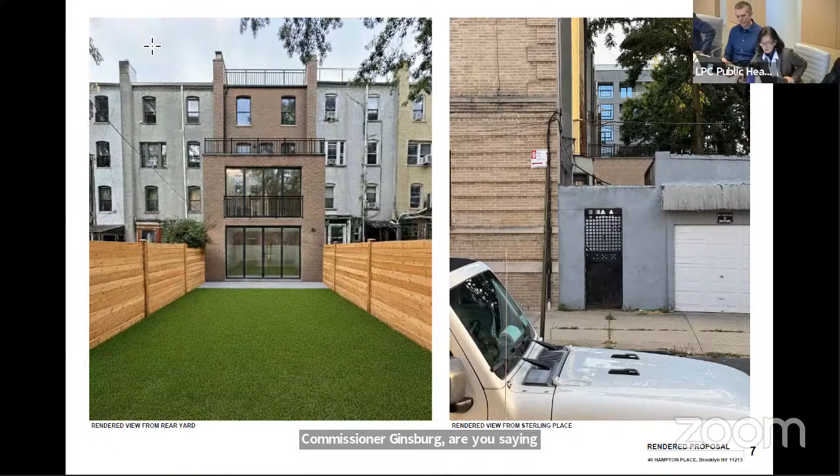Commissioner Ginsberg, are you saying that a bay window above and elements of the bay window to the addition as well? Yeah, I think either, or I could probably go either way. I also agree with Commissioner Mahan that the additions should be reduced in depth.

Can I just clarify further, when you use the phrase bay window talking about the third floor, are you talking about the tripartite window, that original opening, not a projecting oriel type window? You want them to maintain that opening with three windows? That what's shown there is unclear, it could just be that's all. Tripartite, not a bay. Correct. So historically, the row had very shallow oriel type bay windows just at the lowest level. Right. And then at that third floor, it was tripartite but flat.

So I'd say the tripartite but flat would be all right, and potentially on the addition doing some sort of bay if they could, but also reducing the depth of the addition. And you were further suggesting not to put the window between the two? Correct, but to use one of the openings as a door. Correct. And I just wanted to also clarify, because the testimony talked about all of the windows at the back as special windows, which actually none of them are special windows as defined in the rules. The oriels themselves are significant architectural features, that's a different term we use.

I don't know that the report says anything about significant architectural features when it's talking specifically about the upper floor windows. These are still rear facades. Now, it does happen that probably almost all of them are visible to some extent at the upper floors, and therefore staff level rules wouldn't allow many modifications to those upper floor windows anyway, but I just wanted to clarify that.

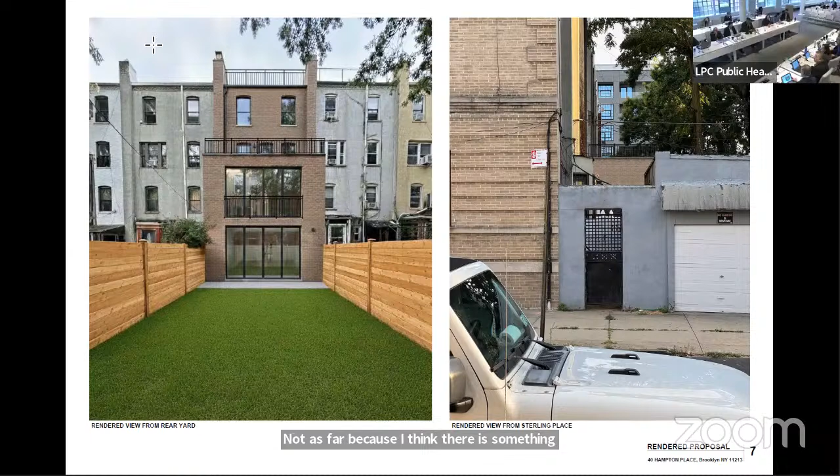Thank you. Commissioner Chu? Yeah, I agree with several comments of my fellow commissioners. I would say that on the third floor, as Mark has put, to retain the historic window openings and to make the window a door, I think is appropriate. It retains the basic elevation of the upper two floors. On the addition, I would reduce the depth of the addition, maybe 5 feet, and I think that would help, because right now it does feel like a bit of an intrusion. This block is a bit unique. It has a big housing building on it.

So the reduction of the depth of the addition—however, I could find the addition appropriate because of the unusual character of this block, having a large scale building right on the rear.

Thank you. Commissioner Jefferson? I agree with Commissioner Chu. Some of the issues, the issue of the bay window, though it's one on the ground floor, is one that really preoccupies me, whether we should add it or not, especially if it's sticking out that much, the volume. And as a kind of reminder of what was there, I would recommend putting it in, but it has to be done carefully and thoughtfully.

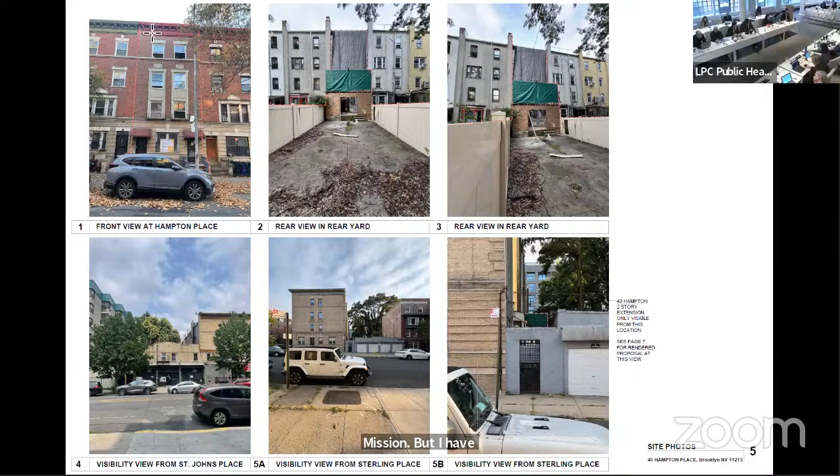Thank you. And Commissioner Chen? Yeah, not to add more confusion, I think one thing that is a consensus is obviously if you're looking at, for example, picture number 2 in the middle on the upper row, that tripartite window is very consistent. So however we worked out, I think that should be figured into the consideration.

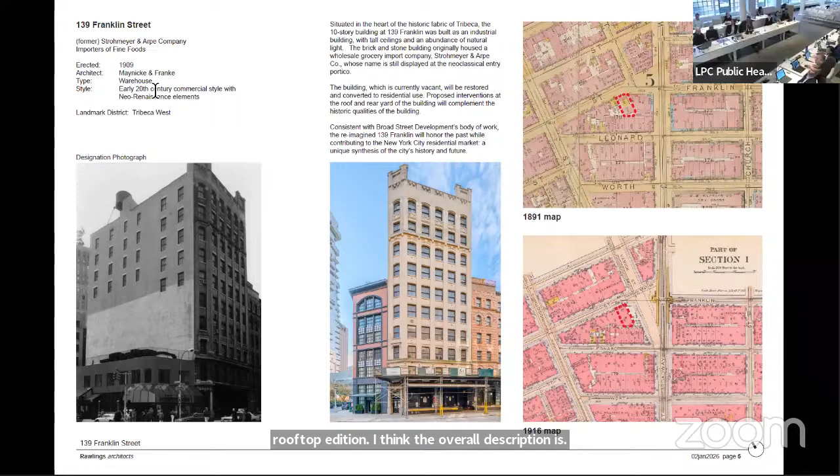I think the overall description is clear. We're talking about a rooftop addition, restoration of the storefront and the canopy, some modifications to the loading dock, and removal of a rear extension. I should also add that the Strohmeyer & Arpe building was used as a self-storage building for many years, and it has not had any meaningful work done to it since the district was designated.

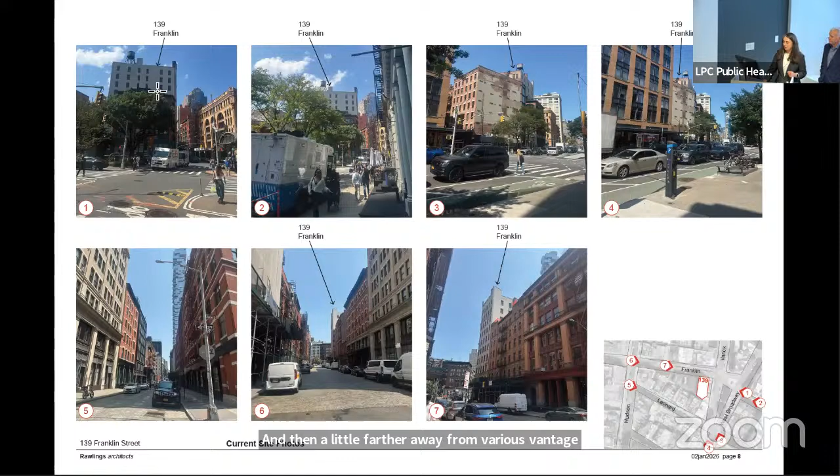Here are those roughly same vantage points today, and then a little farther away from various vantage points, showing how you see the building.

As a part of the proposal, we're proposing a new unoccupied roof bulkhead, which we'll show you the plan in a minute, as well as a new wall at the rear, which will be in plane with the current upper story walls in place of the extension that's being proposed to be removed.

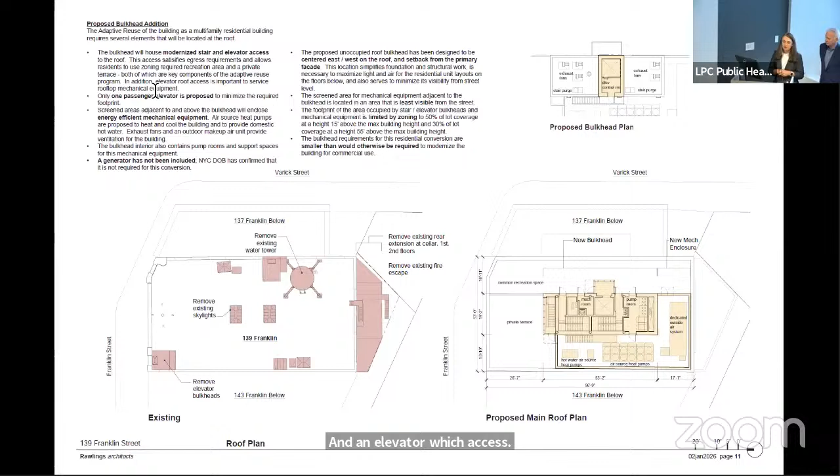We're only proposing 1 elevator. We've gotten approval from the Department of Buildings to not include an emergency generator in our renovation. So what you see program-wise here is 2 egress stairs and an elevator, which access community or common recreation space at the roof, as well as tucked behind that interior bulkhead, some mechanical equipment. There is an interior pump room as well, and then a stair which accesses a private terrace.

The upper right-hand part of the page shows the upper level of the proposed bulkhead, which has some fans as well as the overrun for the elevator and an elevator machine room.

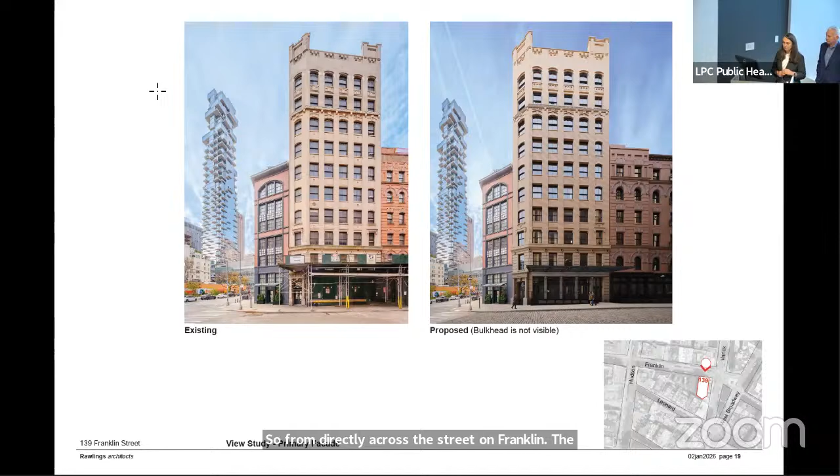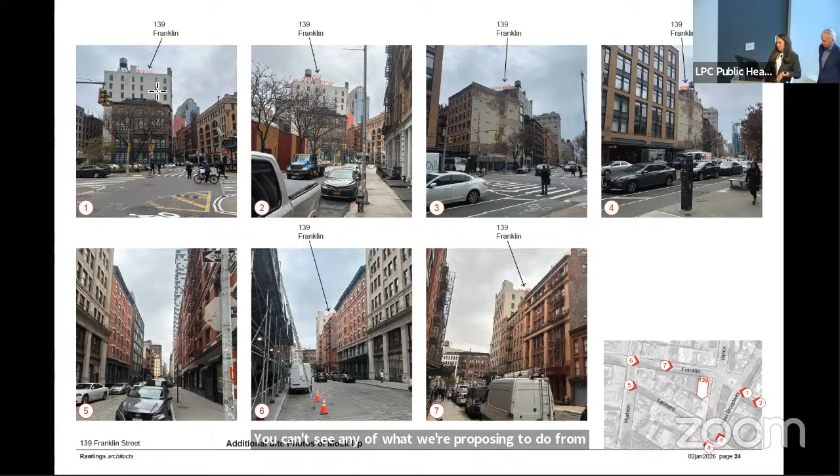So here's a few views standing further away from the building so you get a sense of how visible the bulkhead as proposed is. Number 1 and 2 are on Franklin Street further west, and then 3 and 4 are a little bit further south on West Broadway. And then 5 is looking down Leonard - you can't see any of what we're proposing to do from that vantage point. And then 6 and 7 are both a little farther to the east on Franklin.

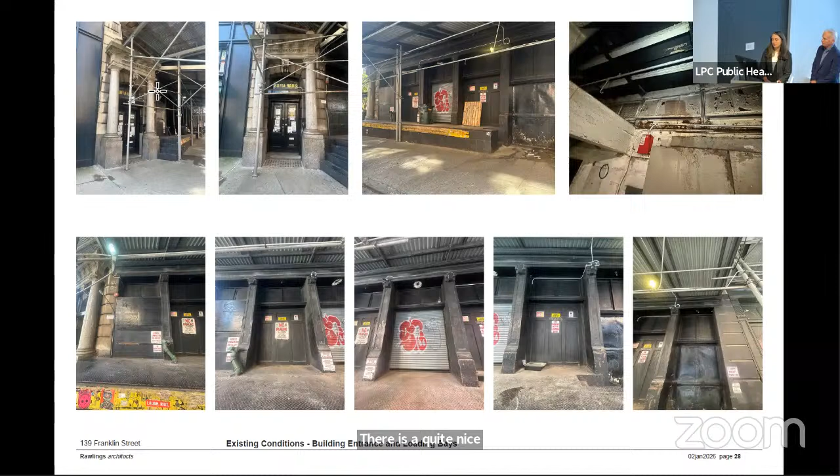Moving to the street level primary facade, these are various photographs of the existing conditions. There's a quite nice stone element surrounding the main building entrance, and much of what is left of the historic loading doors.

It's a little bit of a hodgepodge. There are some historic doors - you can see in the second and fourth images a kind of tripartite door at the bottom with a 2-light transom above, but it's not all left there. One interesting thing we found, in the upper right photograph, is that there are some existing windows in that loading dock which are currently concealed.

That image is from the inside in the cellar, looking out.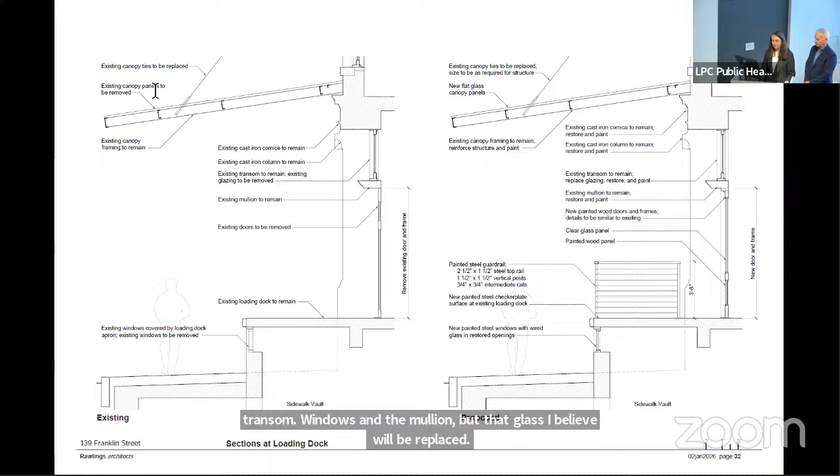Here's a section through the loading dock, existing and proposed. Again, here we're proposing to maintain the transom windows and the mullion. That glass will be replaced, but we'll restore the frames, and then below the horizontal mullion, we're proposing to replace the doors with new infill.

We're proposing to bring back those painted steel windows at the sidewalk vault, as well as a new painted steel guardrail surrounding the loading dock.

Here are two detail sections of railings. The one on the right is the loading dock, so tubes painted, and the one on the left is the proposed guardrail detail for the roof. We are proposing a frameless glass system, which has a base shoe, glass panels, and then a stainless steel channel at the top. There's no vertical metal in this section.

One thing we probably also want to clarify is that the top of the existing parapet varies a little bit in height, and we're proposing to level that out and provide a new coping stone there. But we are not proposing to raise the height of the parapet, and instead provide this railing at the top.

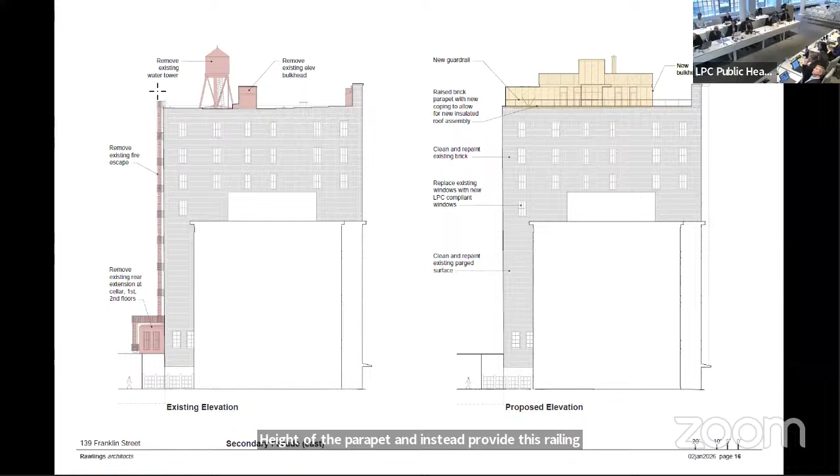Thank you. Commissioners, do we have any questions? Commissioner Ginsberg: The mechanical screen, that's required by zoning?

It is required by zoning, and we've taken great effort to put the mechanical equipment to the south and west, the least visible parts of the building. Also, what we have up there includes outside air units and heat pump units, which create some noise, so we want to acoustically separate those from the neighbors. That's why it's solid.

Commissioner Wilder: Quick question about the removal of the fire escapes. Can you go into more detail about why you're removing them, and how does that removal impact the existing brick facade?

We're proposing to remove them. They're not required by building code or life safety, and we don't think using a fire escape for egress is preferred. They're on the back facade and non-ornamental, so we believe removing them is better for light and air for both our building and the buildings opposite. Our plan is to patch and restore the facade with matching material as we remove that metal.

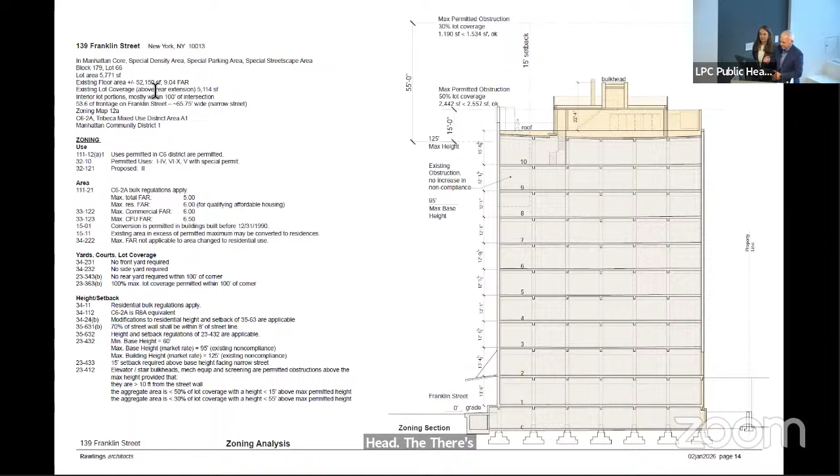Is there any reason you didn't keep it? The reason we did that is partly because of zoning and partly to reduce the apparent bulk of the bulkhead. There's a limitation of 50% and then 30% for obstructions, and our mechanical screen is below that 50% threshold, which you can see here.

Let me see if I can show that line right there. So all of the mechanical corral, if you will, is in that area, and above that it's rendered as the expanded metal mesh, which forms the guardrail and screen around the fans up on the upper roof. I don't know if we have an elevation here.

Let's see if I can get to that. Back one — there you can see this is the screen portion rendered in the solid zinc panel, and then we have a channel to break up the scale, and then this becomes the expanded mesh guardrail, which is more trim. Only the elevator overrun and machine.

Does that answer your question? Yeah, the issue is that it becomes very three-dimensional and draws the eye to it. It'd be simpler if this didn't extend up back here — it would then become a non-conformity, so we're trying to keep it lower.

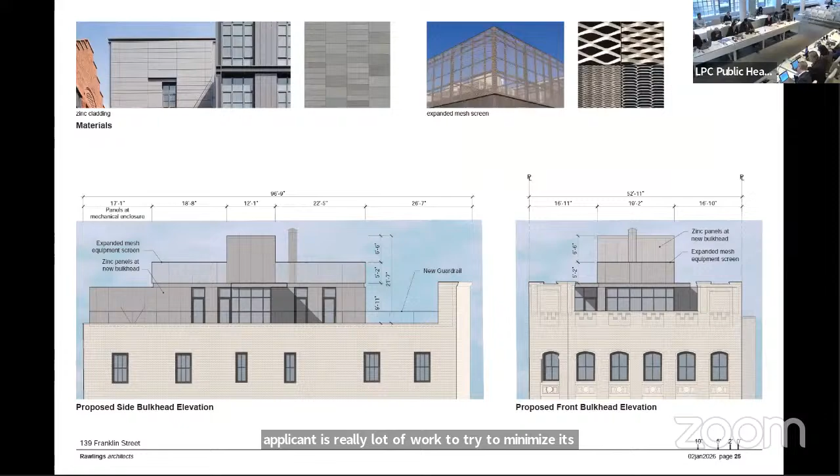Okay. Various elements on this proposal. I think I'll just start from the rooftop. It seems to me that the rooftop, the applicant has really done a lot of work to try to minimize its mass and its location in terms of the sight lines from the sidewalk. You can still see it from distant views of the avenue, which frankly, I think would be very hard to prevent. I'm okay with the massing and the design as being proposed for the mechanical bulkhead.

I think most of the mass is at that lower datum, which is close to the height of the upper raised facade element. I think it's expected that a building of this scale with the conversion will need a significant amount of equipment there. And I do support this adaptive reuse. I think it's great how to take an industrial building and convert it for housing.

The water tower, I do agree, is an iconic element in the skyline. It looks clearly that the applicant has redone the systems, not requiring it anymore. Whether or not that should be retained, I could actually be open to that. If that is because of the visibility of this location, that water tower really is sort of an iconic moment on your building, and I would be interested to see it retained.

The entry downstairs, the storefront, I would support some of the comments made that the detailing could emulate more what is there. I recognize that is opaque, but I do think that the elevation could match more closely the historic condition, and still allow for the glazing within those panels. The symmetry of the entry doors, I agree as well, should be retained and not do the asymmetric side light. I'd like the applicant to relook at that.

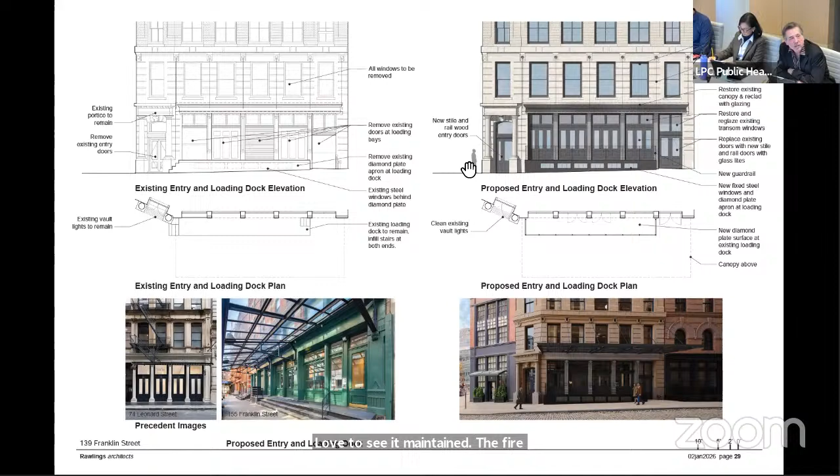The fire escape, although it is a secondary facade, they're visible, and it is the one thing animating that facade. So I think keeping the baskets would be good. Fine to get rid of the stairs on that. And I'd be fine with the asymmetrical doors because the electric openers, although meeting accessibility requirement, are a pain, breakdown, etc. But I could go either way on that.

And I agree that the changes in the ground floor make sense, but they should work with staff to make sure to get the details to match what was there in historic as best they can, as possible.

Commissioner Ginsberg, let me just ask you, did you say that you are okay with the asymmetrical doors or the symmetrical doors? I'm okay with the asymmetrical. Okay, thank you. I think that's staff level, but okay.

Commissioner Mayen? I thought this was a lovely adaptive reuse project. It's going to be a lovely Tribeca residential building. Everything is very simple, very careful. I can wholeheartedly support this. Starting from the top, I think the bulkhead is appropriately scaled given the scale of the building. It's not an insignificant building.

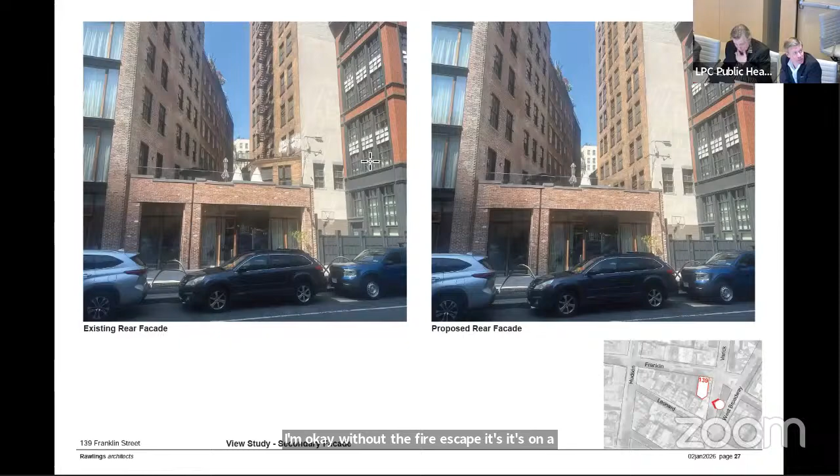I'm okay without the fire escape. It's on a back, secondary facade. I'm okay with the asymmetrical doors. I think that is perfectly logical, and will still retain a sense of the historic doors. I'm okay with the proposal for the loading dock. So I'm okay with everything as is.

Thank you. Commissioner Chen? Yeah, I agree with many of the comments from my colleagues. I think this is a classic example of a good adaptive reuse. I commend the applicant for putting a lot of thoughtful design into it. I have no problem with removing the back addition. I think by making it symmetrical, bringing it to residential windows, those are fine.

I have historically, as most of you know, a fondness for retaining the fire escapes, despite the LPC rules. But I think I agree with the comment to the degree that if you want to retain the basket, that'll be fine.

I do agree with the testimony that the ground floor details on the storefront area, entry area, should work with staff as closely as possible in trying to retain and explore and be sensitive to the historic details.

As to the asymmetrical doors, obviously we love symmetry, as Commissioner Jefferson liked to say, but I'm fine with the asymmetrical, given the reality that we have approved many asymmetrical doors for ADA access. So I'll leave it at that.

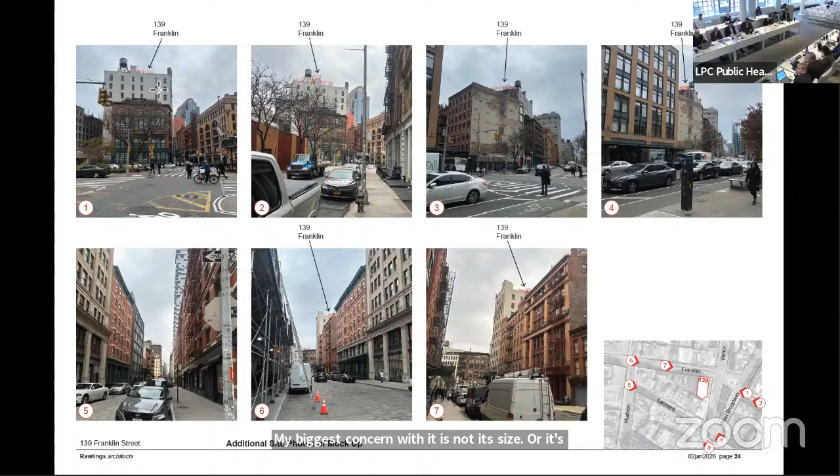However, looking at the building's impression on the city from a distance, its presence as a large, bulky, technical thing on the roof, along with the presence of a bulkhead that extends the sidewall up and is painted to match the sidewall, to me should form more of a template for how the visible rooftop addition should be handled. My biggest concern is not its size or visibility, but its materiality and design. I'm not talking about the expanded metal, I'm talking about the zinc panels, which are very visible from a distance and will look like a very modern addition to this building.

The building has had a history of rooftop accretions that are quite visible from a distance. I don't think this should depart from the way they were handled. So I think the applicant could work with staff to either have the parts that are coplanar with the exterior facades carry the facade material up, like the bulkhead does now, maybe up to the screening, and then the screening takes over. The panelizing has the scale of a modern paneled building, as opposed to a standing seam or what you'd normally see on a rooftop.

Another way to look at it is the bulkhead maybe should take inspiration from the water tower. I think designing it as a finished, modern, rather generic metal paneled structure is not the way to go. To have this engage in a dialogue with a building that has had a history of rooftop additions, I don't have a problem with the volume or placement of it, but I do have a problem with the expression of it. I think they could work with staff to improve that.

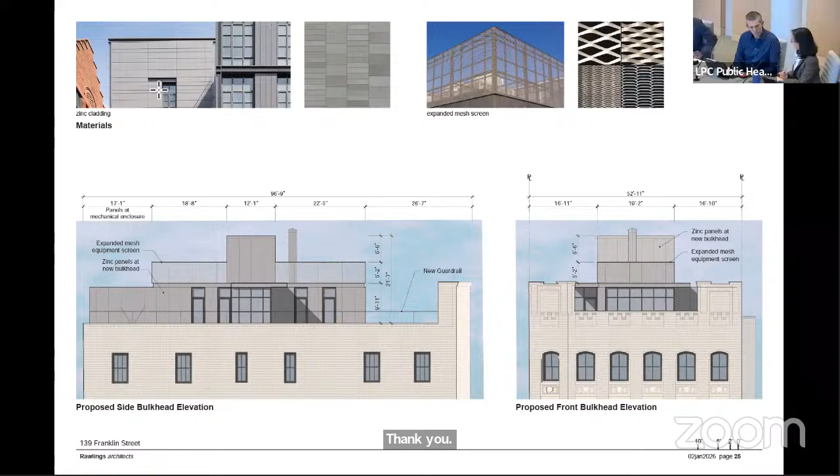All right, I'm going to attempt to summarize where this is headed. Generally, I think there's broad support for this adaptive use project, starting with the rooftop work. Understanding the fondness for the water towers and acceptance that it's something regularly done and practical and appropriate here, in addition to the volume of the rooftop addition being proposed, we can ask the applicants to study the design materiality and look for a better recall of the historic bulkhead and tank materials and design, but otherwise be okay in supporting the size and visibility of that rooftop addition.

With regard to the fire escape, I think it was close. It seemed like there may be enough votes to okay removing the entire fire escape, but perhaps they could consider keeping just the landings if that's something they want as an amenity. But I think maybe we could see if we have enough votes for removing that fire escape at the rear in its entirety. There's support for removing the chamfered rear extension at the back fully and patching that in with new matching brickwork and windows.

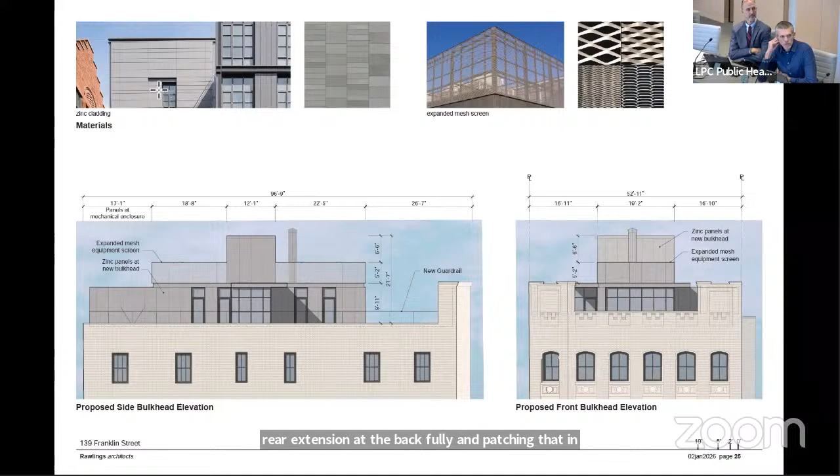And then with regard to the front, again, I think it was close. I was hearing that there is enough support for the asymmetrical doors at that main at-grade entrance if they are to otherwise match the historic detailing as closely as possible. But again, we can ask them to consider using an actuator and keeping the historic doors if that works for their program. Then, last, with regard to the infill below the canopy, really looking to retain the remaining historic doors, loading doors, paneled doors, but with the possibility of modifying them to incorporate glazing, and then using that as the template to design the new infill that would go to the sides where there is no historic infill. I think that covers it, but you can see if we have enough votes for that. Working with staff, yes.

Commissioner True, are you okay with reading that? Yeah, I mean, I think the only real comment here that's substantial is about the baskets—we don't have enough votes, you said, to retain them. Well, I think it does.

I guess we need to ask if any of the commissioners object—let's start with the asymmetrical door. Do we have anyone who objects to that, understanding the discussion that's taken place since comments? Okay. And with regard to the fire escape, it's complete removal versus retaining the baskets.

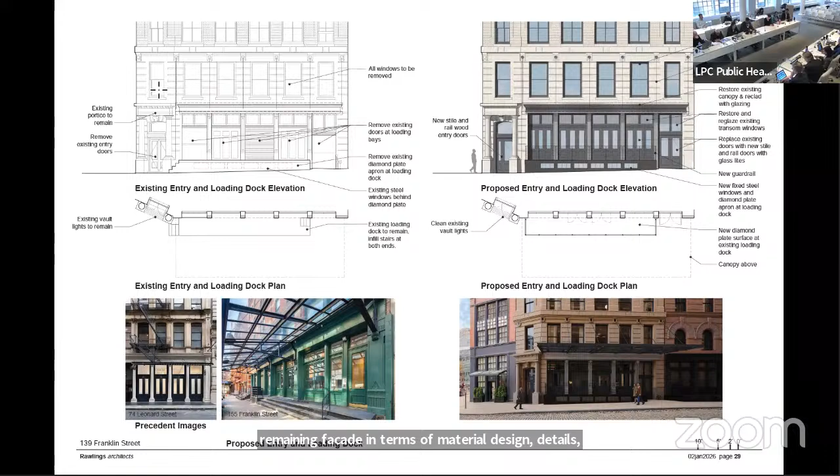That the removal of the existing utilitarian three-story rear extension will not eliminate a significant architectural feature, and the new rear facade will align with and match the remaining facade in terms of material, design, details, and fenestration pattern. That the proposed modest raising of the parapets will match the facades below in terms of material and finish, and will not alter the building's silhouette.

That the proposed glass railings set between the parapets will have a non-reflective coating, helping them recede from view in this tall building. That the presence of a visible rooftop addition will be in keeping with historic rooftop accretions found at other buildings of this type and age, and will be seen within the context of varied streetscapes, including a variety of rooftop accretions and some taller background buildings.

That the rooftop addition will not be visible directly over the primary facade, and when viewed over secondary facades from West Broadway and Franklin Street, the simple massing and typical materials consisting of gray finished zinc cladding and metal mesh screens will be consistent with the utilitarian character of the rooftop accretions within the district and will not overwhelm the building. The applicant is to work with staff on refining and finalizing the material and color choice of the rooftop addition.

That the proposed work will facilitate the adaptive reuse of this historic warehouse as a residential building and will not detract from the special architectural and historic character of the Tribeca West Historic District.